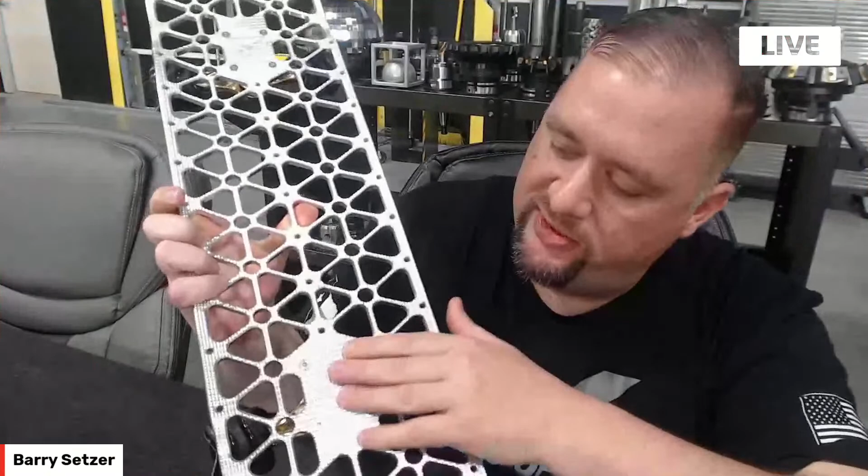You can see that it does have a texture to it. So how did you guys... Oh, that's machined in. Just little machined dimpling? Permanent grip tape. Yeah, that's fantastic, man. Oh yeah, man, it was super cool. That was probably my favorite video.

And then, is that a tutorial? In that video, do you get into how you would machine this? How deep do you get? We got pretty deep in the programming side of it and the method that we used. The modeling we didn't get into all that much. It was kind of simple. I just modeled the quadrant of the board, the surface, and then just mirrored it around, mirrored it twice, and then thickened it.

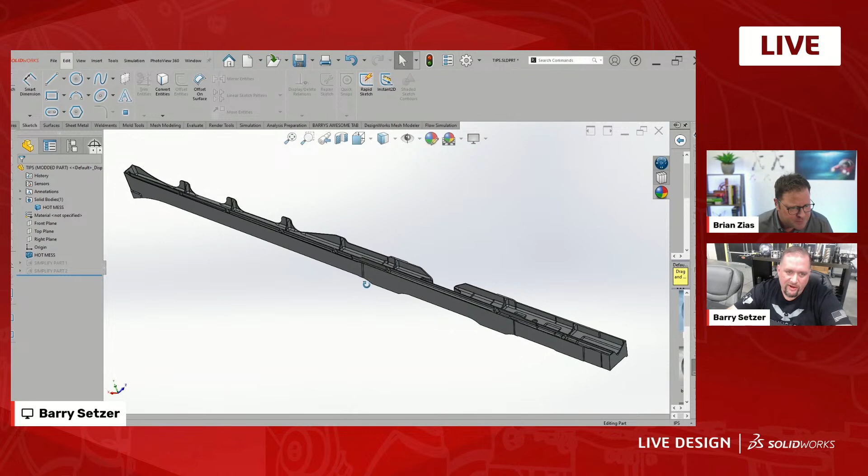So this is an aerospace component, and maybe you can share a little more of the background and what's the girth of this thing. It looks very slender and difficult. Yeah, so it's roughly 12 feet long and maybe 8 inches wide at the widest point. Twelve foot, 8 inch. Yep, this was probably the most difficult part I ever had to model in my career. Took me several months to finish it, and it may not look like much, but once you understand aircraft drawings, all of these surfaces are lofted, they're all tapered, nothing's flat. It's got tilted walls and fillets everywhere, and it was just a nightmare.

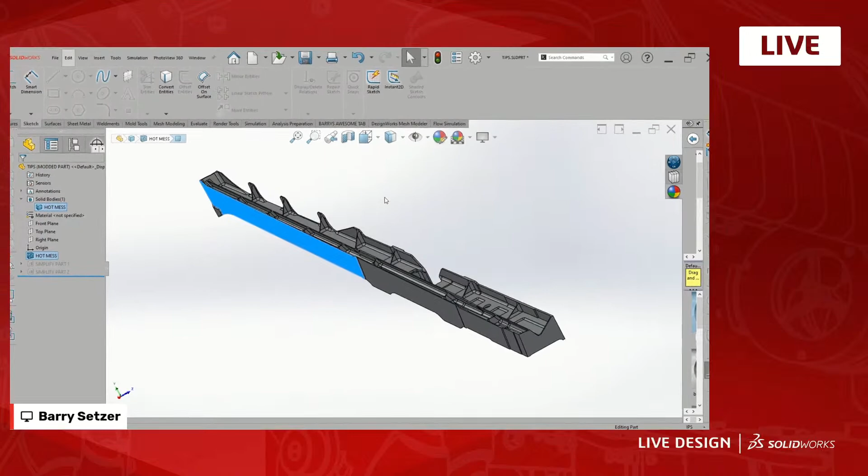And it was a hand-drawn drawing. Well, let me say to everyone out there, Barry showed me under the hood already, there is a whole surface modeling masterclass in terms of legacy drawings, TIFF files, scanning them. You said you hunted out 20 drawings. You're creating line art, surface extrudes off sketch pictures. That's a whole other topic, but I don't know if we have time. If you guys want to see that, let us know in the chat. Do you want us to get back into modeling this from legacy drawings?

Because I also loved where you were starting here, which is a hot mess. There's not even a material on this thing. It's a dumb solid, like a STEP file. This is typical of what we all end up starting with, right? A dumb solid, one way or another. Yeah, and I'm lucky because I actually modeled this part and then saved it as a dumb solid to simplify it for this video. That's cheating, but only a little bit, because the quality, the fidelity, the kernel is going to be the same. But barring all that, what is the material?

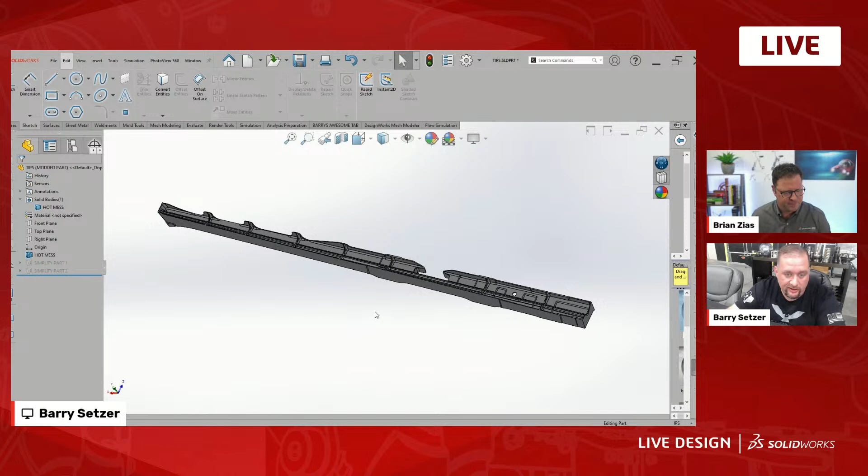A 12-foot beam. It's a spar. It was aluminum, I think 7075. 7075, like a T6 or something. Yep, for primary aircraft structure. This was something that went into the wing of an aircraft. Now, granted, I changed this part considerably, so nothing on it is the original dimensions. So it's a very sophisticated beam that you're not going to be welding up plate by plate. This thing is machined out of a solid billet of 7075. So you want to get this right the first time, or that's a ton of material taken out, and a ton of time.

So dude, all these undercuts and stuff. Yeah, so let's assume, and one thing that Barry highlighted in his last stream, which is that your data can come from anywhere. It could be sketch pictures, it could be TIFF files of Mylar drawings, it could be IGES, it could be a point cloud, and you need to be agile.

Yeah, and one of the things that I appreciate now after watching that is, no matter if the model is perfect, right? It's watertight, it's a solid, but you can't just put this into CAM and expect feature recognition to carry the way. There's a lot of specific modifications you do to this. Talk about fillets, maybe some ribs, some setbacks. Yep. How are you going to accomplish all that? Because you're definitely not going to put an ECO in and go back to the original SolidWorks or get involved in any of that. You just need to make the changes so that you can go and program it.

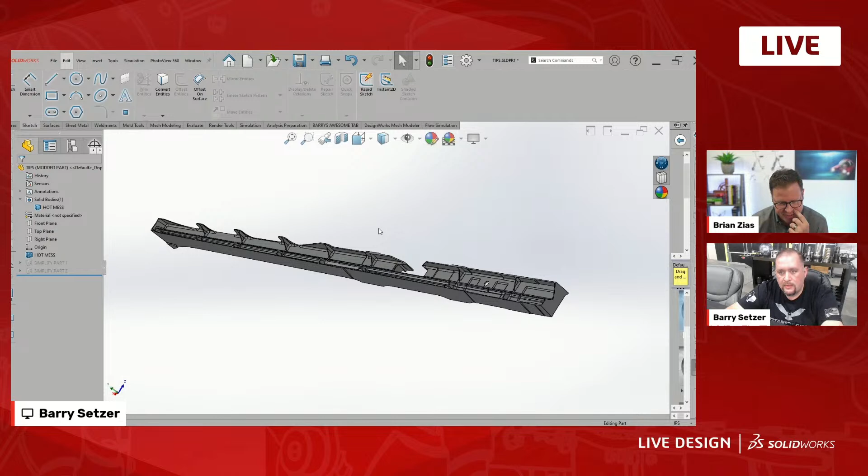I mean, what are some of the things you're looking at right away that need to change after you get this part? Well, you look at the part like this, and you can't. Feature recognition is great, but on something like this, you just can't do it because there's so much going on. So many lofted surfaces, so many crazy fillets. I showed you the actual tree yesterday where I was on like fillet number 270. I thought it was 400. Guys, again, it's a master class. It was brutal.

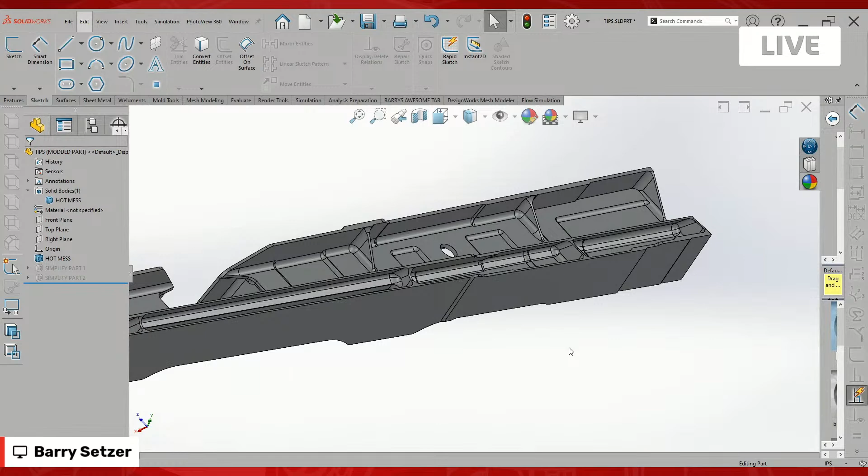But when you get a part like this in machining, a lot of times you'll get a model and say that this is a Rev F model, but then there'll be like 7 EOs after it that are changing things, but this Rev F model doesn't have that. So as the machinist, I have to look at those EOs and I have to modify the features that are required for the finished part because it won't match this model. Oh man, so you end up having to put all the input together and basically be the final CAD designer. Yep.

And again, this is something I want to come back to if we have time: then how do we get that back in engineering hands, right? There's so much modification that happens during fabrication, installation. Yeah. And it's funny, a lot of the times you'll model a part like this for a third party, and you'll ask them, hey, do you want me to send you the model so you could share it with your customer? And they're like, nah, we'll never use it. Oh yeah. It's like, okay. So yeah, there's a lot of stuff, you can't just send this to CAM.

So again, what are the things you're looking at? What tools are you going to be deploying here? So part of being a good designer or a good CNC programmer is not only being accurate with everything and paying attention to detail, but it's also about being fast. A part like this, you can't spend a year on the model and then another year programming it. You have to get things done fast. And in my experience with SolidWorks, I've been using it since 2005, so almost 20 years now. And what I've found is anytime that I'm struggling with something or something seems too hard, that usually means that I'm doing it the wrong way.

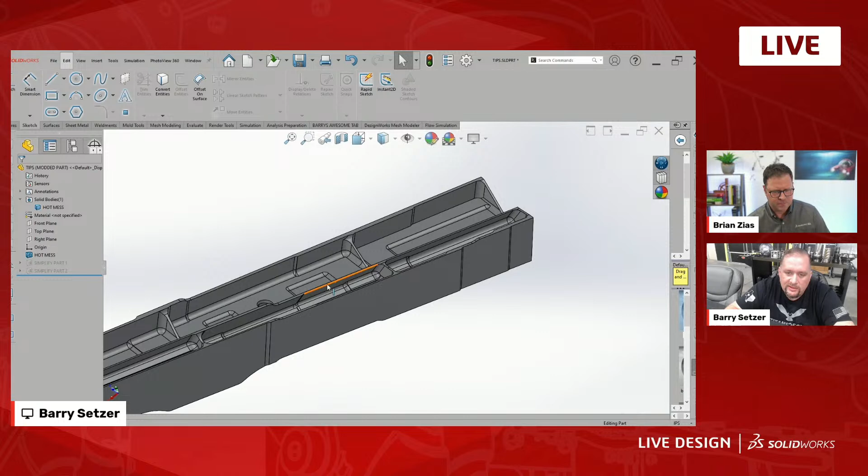And so I wanted to talk a little bit today about some of the things that'll make you faster, things like understanding what certain errors mean and what's causing them, how to fix them, and how to take some shortcuts that, even if a shortcut only saves you, say, 5 seconds a day, over 20 years that adds up. So sometimes it's the little things and sometimes it's basic things. We talked yesterday about how there were times where I was doing things the dumbest way imaginable for years until I saw somebody do something and I was like, wait, how did you just do that?

So there's going to be things in our live today that will appeal more to beginners. Some of it will appeal more to experts, but I kind of wanted to cover a full gamut so that we had something for everybody. This is going to be fantastic. Yeah, Barry was showing me some stuff with delete face. Last time we were talking about offset, copy surface.

I mean, just everyday tools you need to know about. And we were talking yesterday about these are things you learn years on that you look back and you're like, oh man, if only I had known about delete face earlier or offset surface or convert entities. These aha moments. So it's not just using S key and all these shortcuts, which maybe you can dabble some of those in, but how do you take some of the best tools, put them all in one tab of your toolbar, and this is your everyday tool belt on your machine there.

So, all right, what's the first one you want to deploy on this? Well, since you brought it up, we'll start with something super simple. If you look at all of the tabs that we have in SolidWorks, there's a lot of stuff in there, but what sometimes you might not realize is there's even more that's not shown up here. So, for me, I know the tools that I use on a day-to-day basis. So I've created Barry's awesome tab. Okay, pause here. This is the one: delete body, delete face.

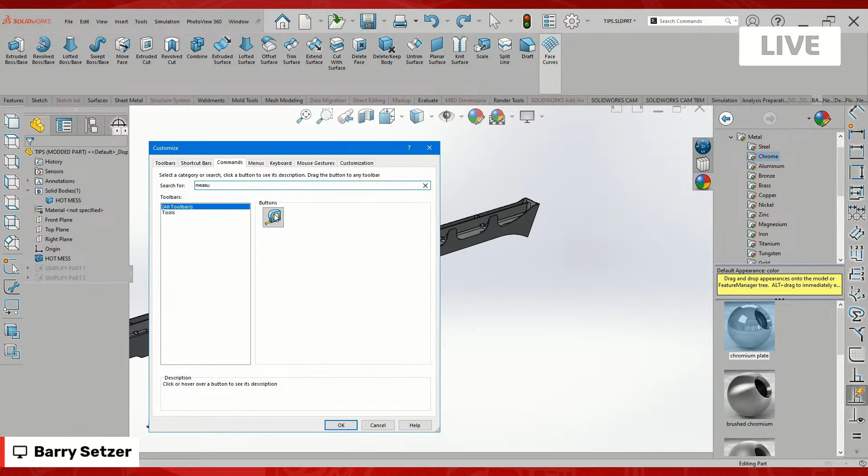Well, you know what you can do now. Are you in 2023, by the way, or what version? Oh, why are you asking? S key command search, by the way. You bring up the shortcut bar, and the command search is right there. 2023, yep. But if you're not using 2023, you can just find the command you want and just drag it up to your toolbar. Done deal. So now I got measure up here.

I like little things like that because this toolbar saves me maybe a split second of going to a different toolbar. And as I use this toolbar more and more, you get that muscle memory of knowing where an icon is. You don't even really look at the picture anymore. So that's just one little tiny thing that helps. But I like the fact that you can create your own toolbars and put your most commonly used things up there.

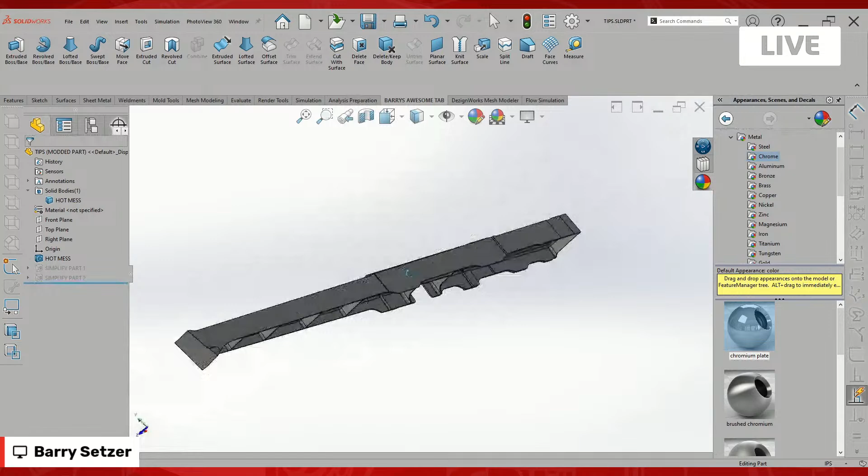But when you start looking at this part, let's just say they want an additional rib, 3 inches off of this face, that goes from this wall to the wall next to it. Now, imagine that's got to be tapered or drafted. Is that the right way to say that? Yep. They're drafted and they're also tapered outward, so you can't just draw a rectangle on the floor and emboss that up. There's a lot of things you can do to cheat it, but in this case, I wanted to show two methods that I use when I have to do something like this, especially on contoured parts or parts where I don't have edges that I can convert.

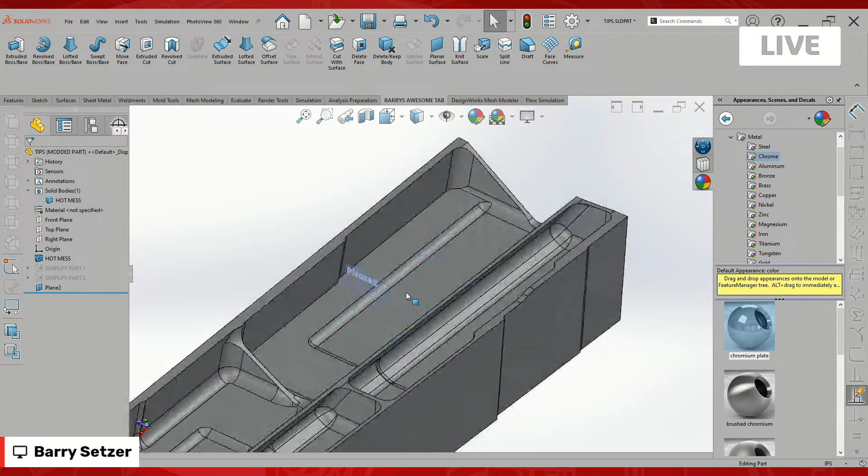So the first way, we're going to go ahead and put a plane in, say 3 inches off of that face. Is that going to be the mid plane? No, I'm going to use this as one of the outside planes. We're going to create a loft here. But to get the geometry of these walls and floors, to get actual edges that I can use, the first tool I'm going to use is split line.

So we're going to use this plane, and then we're going to select the faces that we want to split. Oh, interesting, I haven't used this in years. With simulation, this was a godsend because you could split where you want to apply a force. Yeah, show that one more time. Sure.

That is one of those tools we were just talking about. If you are just learning that now, again, tell me that years ago when I started. So yeah, and split line I think is part of the mold tools toolbox, but again, I have it out here on my Barry's Awesome tab. So all you got to do is click.

We created our plane. We're going to pick split line, intersection, and all of these things are useful. You just got to play with it to know what each one does. So you're not making a sketch or trying to do some 3D sketch or multiple planar sketches and convert entities. It just slices all those faces with this plane. Yep. And you could probably do surface bodies if you want to do some kind of curvilinear intersect.

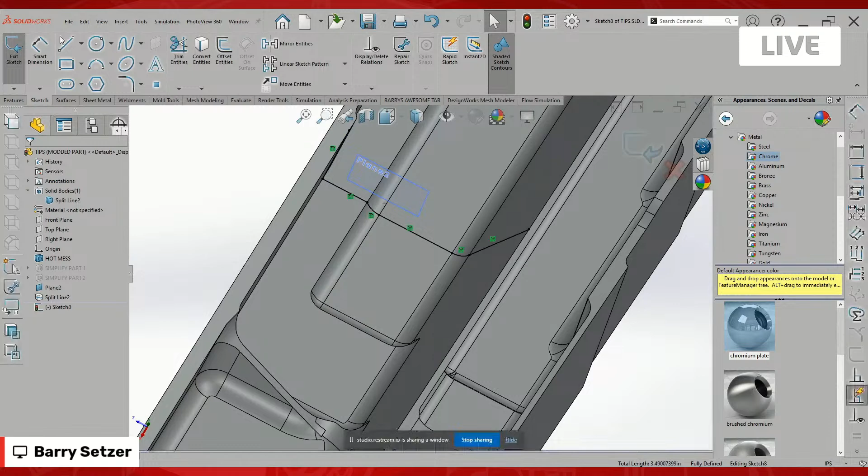Yeah, we could. And I kind of wanted to show this so that we can see how we can get those edges at the exact plane where we need them. Wow, that's great. And now that we have those edges, we can do just a plain sketch on that same plane. We can convert those edges. Whoops, not that face. Yep. That's brilliant. Yep, and then we just draw our line across the top. Boom. Now, that's one section of our loft.

For the second one, we're going to do it a little bit different way, but I like this way because I've used it for a whole lot of different things, and a couple of the other guys here have also found it useful. So now we're going to create another plane, 1/8 of an inch off of that one. And now, rather than using split line, and sometimes you may not want to use split line because you want this to be a continuous surface when we get into machining for our CAM software.

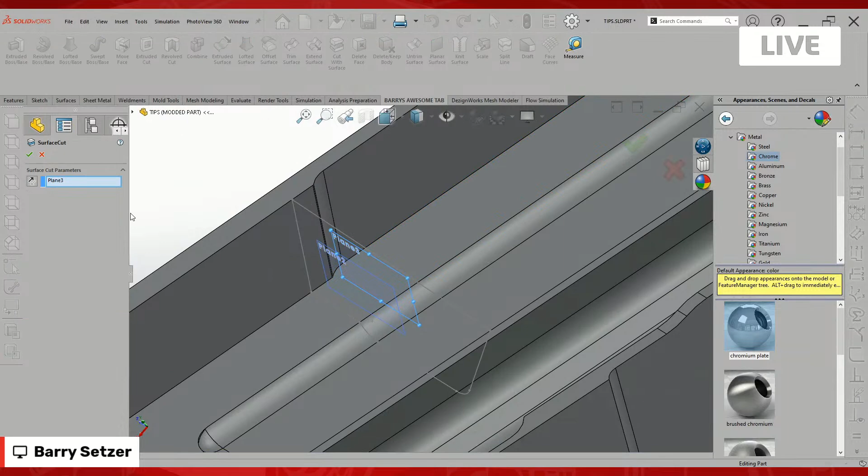So what we're going to do this time is we're going to select that new plane, and we're going to do cut with surface, and we're going to cut our part off that plane. Now we still want the stuff that we cut away, but now we want these edges here. So what we're going to do is on that plane that we used to cut, we're going to sketch. We're going to do just like we did with split line. Draw our little top line here.

Dude, you are stealing edges. This is great. Yep. And I like to call this a ghost sketch. A ghost sketch. Okay, I was gonna say, what do you call this? Yeah. So right now, if I were to close out of this sketch and delete that surface cut, my sketch will have rebuild errors in it because it's tied to these edges that are no longer going to exist. And that's something that, going from like CATIA to SolidWorks, SolidWorks' tree is chronological, and I love that about it because what you did here can't exist until what you did before.

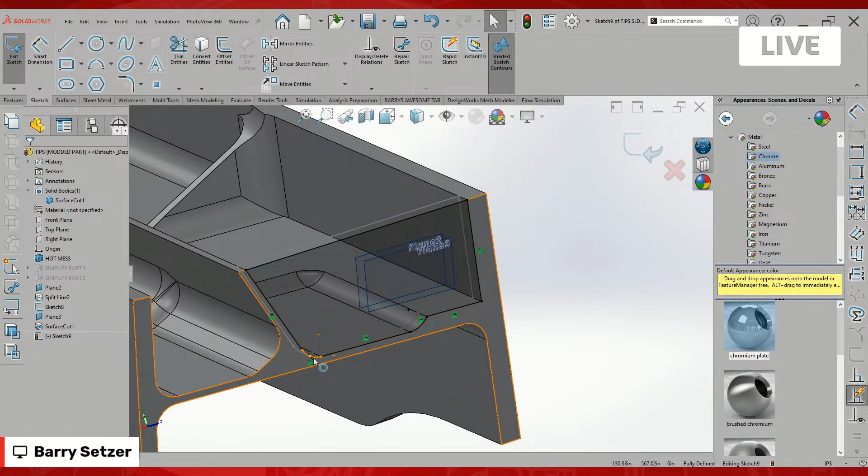Oh, my mouse is going crazy. Zoom to fit. Yeah, there you go.

So in CATIA, what would be different about that? The references, the edge references. Yeah, I mean, back when I was using it, I'm not sure what it's like today, but it had like a separate tree for curves and separate tree for surfaces, and it was just really different to me because I'd used SolidWorks for years before I got into CATIA, and my bread and butter has always been SolidWorks. I've always been a little bit better with it.

But with this sketch here, so that we don't end up getting that rebuild error, we're going to just right click off in space and say display delete relations. Sure. We're going to delete all of our relations. Yeah. Okay. And then we're going to pick our whole sketch and fix it. Sure. It's like an in context assembly, part modeling, no references made.

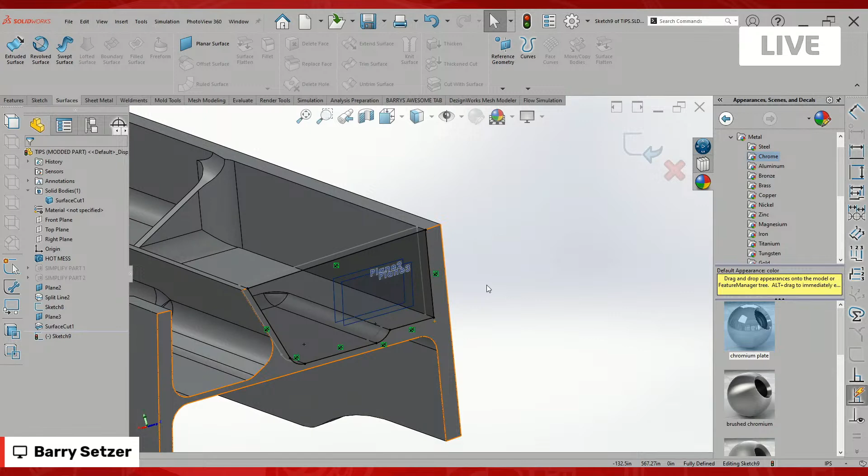That's right. And that's why you got to be careful when you do this, not to sketch on this face, but to sketch on the plane. Because if you sketch on this face, that face is going to go away here in just a second, and then you're going to have another rebuild error for not being able to find the sketch.

Oh, this is great. So just to recap the last couple minutes, what Barry showed us is what he's calling a ghost sketch, which is the next station for his loft. The first one, the plane one, he was showing us using intersect or split line to create an intersection. That's great, but here he doesn't want to create any sharp edges, right?

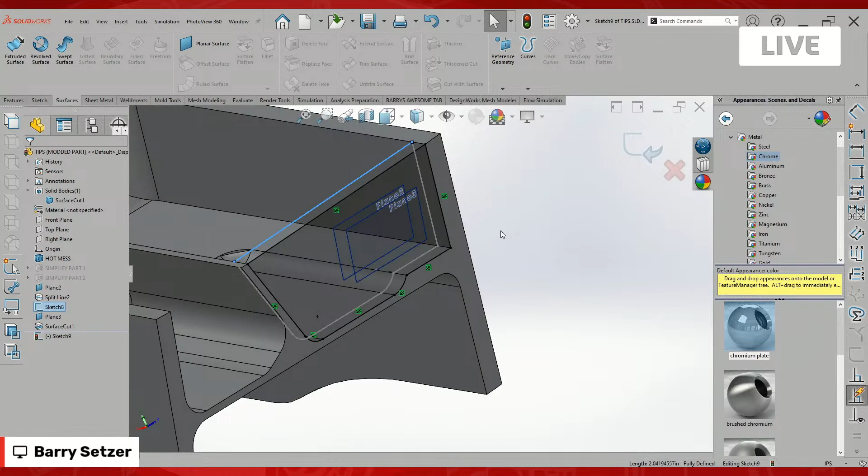Just have those sketch entities. So a lot of, I think, under the hood SolidWorks model tinkering probably comes down to techniques like this. This can be very handy to get the edges you need to then create one more station. Or is this it for your loft? Do you need another one? This will be it for this one.

All right, let's see the next step here. I know everyone's eager to see where do you go from here. So once we get out of there, we now have this sketch using those edges that we just created with that surface cut. But now if we delete that surface cut, our sketch is still there. Nice. Not dirty. And now we have our whole part back. Yep.

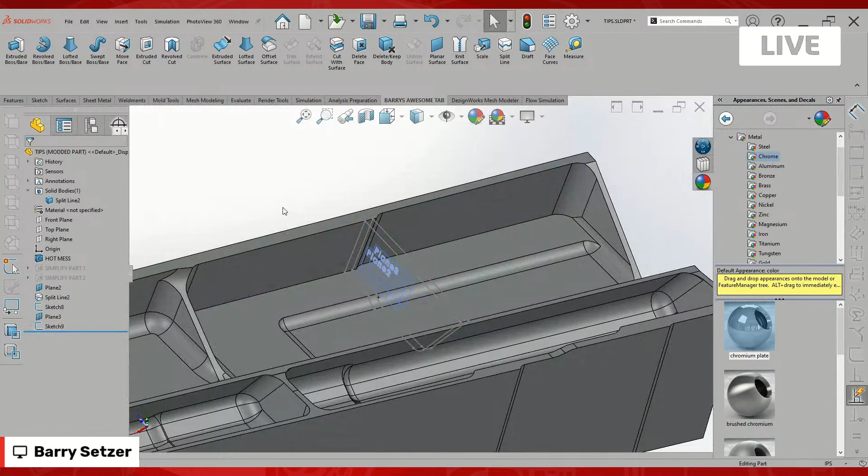So the next thing I wanted to show, a lot of getting good and fast in SolidWorks is when you get errors that you understand what they mean and why you're getting them. So right here, if I wanted to create this new rib, I could just loft it, kind of clicking it in the same spot. And I talked about that a little bit, the last one, I was gonna say the tangents or the connection lines. Yeah, and we'll show that again real quick.

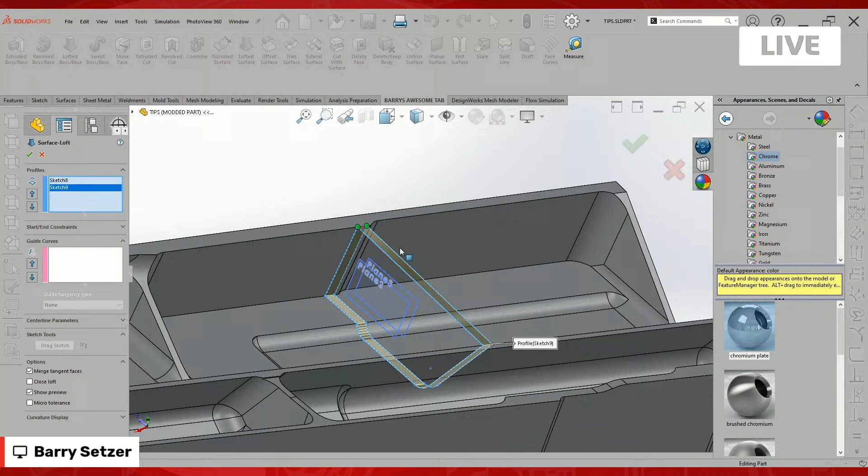Back when I first started lofting, I had no clue what was happening. I would just do like that, and it's like, that is not what I want at all. And then one day I accidentally dragged this little control ball here, and it was like, oh, so I just got to make sure that they line up with each other. That can be kind of tough if you have two sketches that have a different number of sketch entities in them, but usually you'll be able to figure it out pretty easy.

So you have same number of segments, which is key, and then when you select it, just same general area is going to really help you out. And then there's obviously the curvature display on the bottom if you had more than two sections there. But yeah, that looks great. That's going to follow the surface. I would have probably done something like trying to offset those surfaces, done the planes, and then done an intersect or a combine type thing. But this is great. I really love what you did there.

And that's the beauty of this. I will never say that I'm showing you the best way to do this, but I'm showing you a way. It was fast too. We're 10 minutes on that one.

Yeah, and that's with me sitting here blabbing the whole time. You and me both, my friend. But it's fun. It's our show. Yeah, and folks are enjoying it in the chat.

We got Michael Paul: if you use intersection curves, you don't have any dangling relations. That's true. You could also use an intersection curve and not split the face. But I think that's a good point you made last episode, Barry. You said at first there's hundreds of ways to do something. There's no right or wrong way as long as you end at the result you want. And then later in the show you said thousands. I'm thinking, there's maybe dozens and at least two that are going to get a hot debate. But either way, if you have more ways to get the edges you need for your loft, that's fantastic.

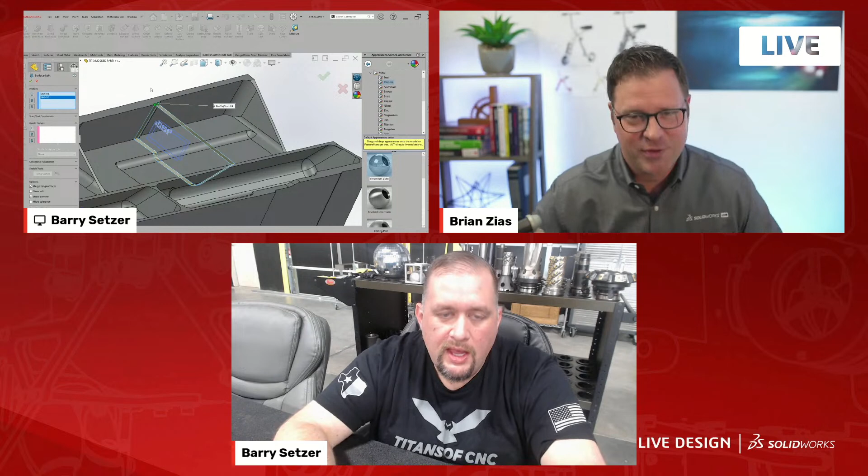This particular application of these two methods may not be the best example, but there have been times where intersection curve wouldn't work for me, the split line wouldn't work for me, and the ghost sketching did. Just knowing the methods available to me, when one thing doesn't work, I can use one of these other ways. And I think that's super important for anybody that uses design software like this every day, is just knowing what's out there.

And having worked with this for so long, I can tell you right now that because I have this new feature merging with my solid body, I know right away that when I click check mark, this is not going to work. Of course. Oh, surface. Oh, no, it did it as a surface. Okay, that's what happened. I wasn't sure if you meant to do that, because you could definitely do the surfacing route. Use plane, intersect tool. Yeah, I meant to use lofted body. And what's cool?

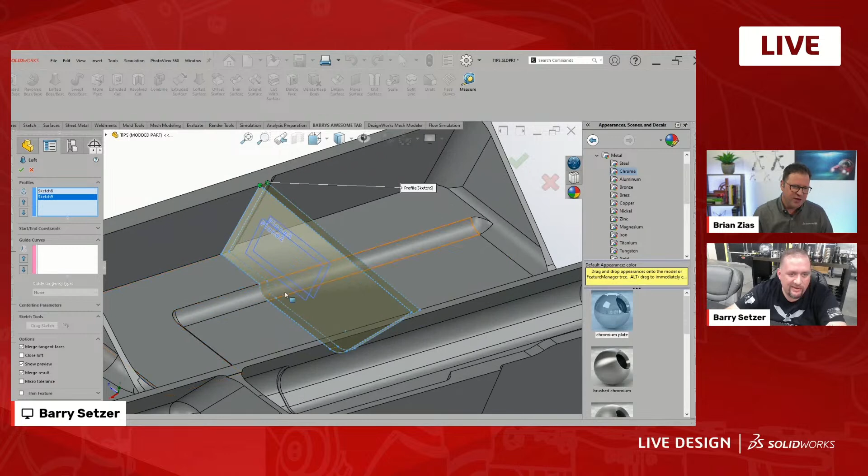I was thinking you could actually, if you had to, tilt the planes by a degree or two to actually make, I guess it would be a planar line. But it has to be drafted, right? How are you going to accomplish that? Well, this particular one doesn't have to be drafted. All these other ribs aren't. Okay. They're vertical, but you can machine that then.

Yeah, but we could have done a similar thing and just sketched a 3D sketch here on this wall at the angle we wanted, and then done the same thing, created a plane using that line and gone from there. But to get into the problems of what's about to happen here, I want these two bodies to be one solid body together, but if I tell it to do that, it's going to tell me no, and it's saying that it would result in zero thickness geometry.

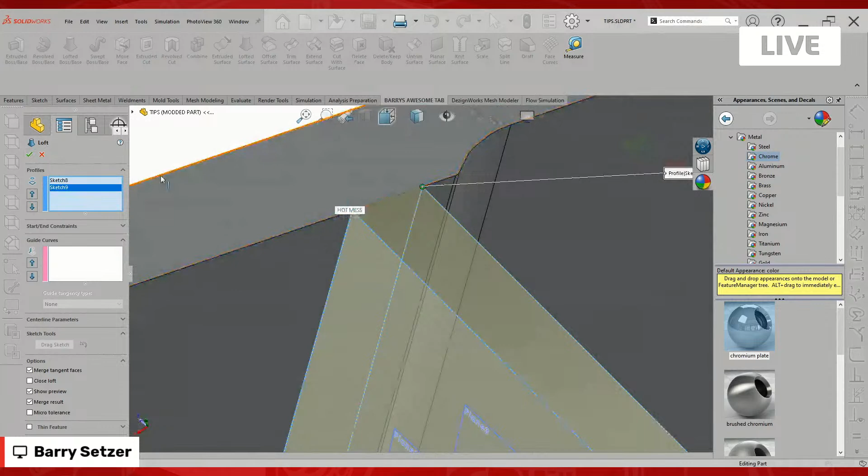So what it's telling me is that there's tiny little gaps, or literally what it's saying, zero thickness geometry. So it's not able to merge that body for me. So there's two different ways we can fix it. I'll show both. The first is we can use guide curves. So every edge that we have there, we're going to pick each one. Or else it's just going to do a linear interpolation between your sketch entities unless you guide it.

Right. And the surface, even though it looks straight, especially if it's imported, who knows what kind of variation it has, and they do have some curvature in them. So if I give it guide curves now, it should work. And it did. Oh man, that's fantastic. And you have one body. Just to double check, one solid body, so you can go ahead and apply that generous fillet on the inside. That looks pretty generous, exactly.

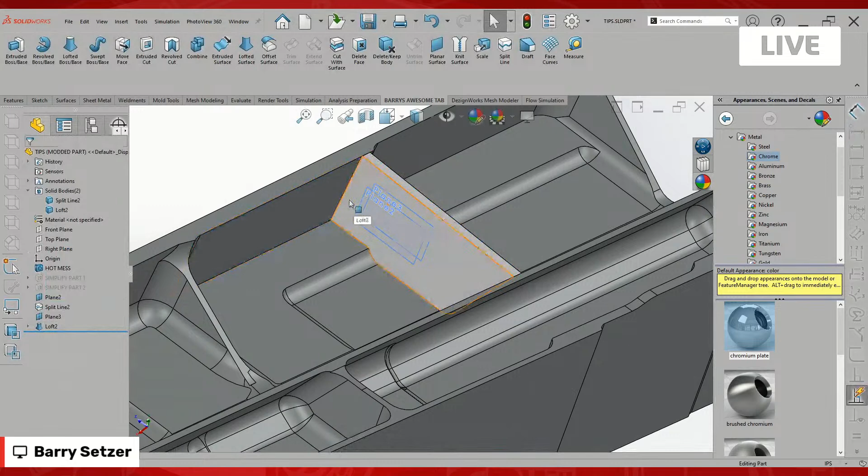And alternately, if we didn't want to give it guide curves, we could just not merge it. Now we have two solid bodies in our tree. We'll hide the one, and then we're just going to offset the surfaces by just a tiny bit, 10 thousandths. Overbuild it, right, and then let it just blend together magically by the power of solid continual geometry. Blend thine self. Oh wow.

That's a great example. I could have seen myself offsetting those inner channels, but that creates some pretty heavy, big surfaces. That's a lot of overhead. If you're doing 100 of these little tweaks to the model, this is a very economical way to do it. And it's fast and easy. And sorry, I said offset surface because I'm so used to clicking on that, but it's move face. Offset surface would create an additional surface body, but move face just does that and then knits it, creates that extension.

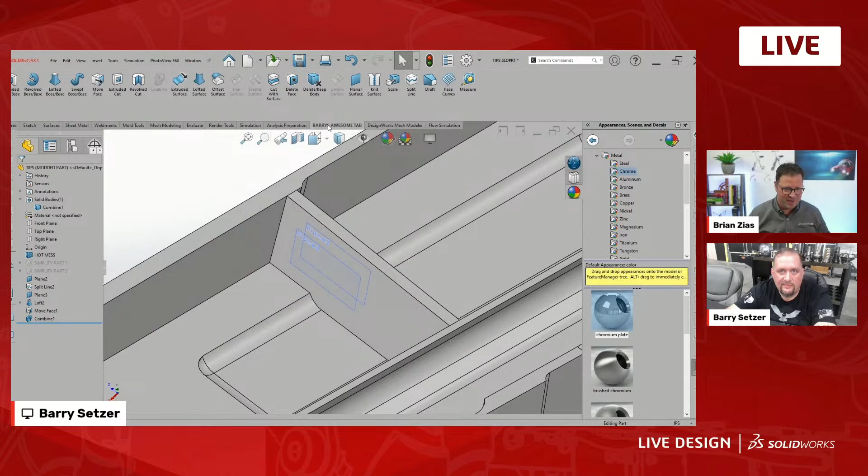So now if we show our other solid body, you can see that they're intersecting with each other. So now we can just use combine. By the way, guys, multi-body modeling, we've covered it six times now on Live Design. If you go back, I think it was December, Brad Williamson hosted an episode with me, and we looked at my workbench, which is a giant dimensional lumber multi-body model. So we talked about that solid bodies folder, how important it is.

At this point, getting into any type of modeling like this, if you're new to SolidWorks, just master the solid bodies folder and have it shown all the time. Right now, I think it auto hides sometimes. You don't want that. You want to be a master of your bodies folder. That's right. And you have to be constantly cognizant of what's in there, because there's been a lot of times where I thought I was working on a solid body, but realized later something I had done, deleted a face or something, turned it into a surface body. So I always keep an eye on what I've got in there.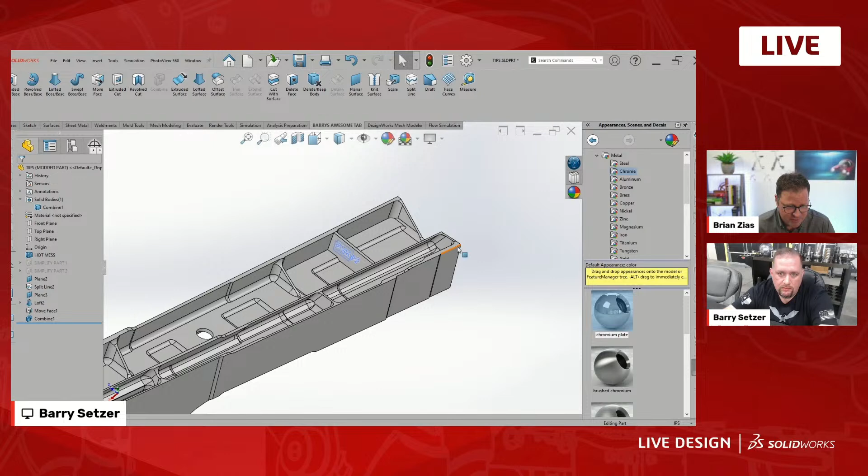Barry just created a really nice rib. So I was looking at that fillet on the other ones. That's pretty big. Is that easy for you to mill out when they give you nice chunky fillets like that?

The bigger the fillets, the cheaper it's going to be to machine in almost every case, particularly wall fillets. Okay. So, I did a SolidWorks tips and tricks video on design for manufacture for our own YouTube channel. Yep. And I talk about a lot of this, and I give the rules. If you're going to make a wall fillet, don't make it an even fractional number, because most of our cutting tools are going to come in those even fractional numbers.

So if you make it exactly 1/4 of an inch, I have to use a tool a step down from that. Otherwise, my tool path will have a sharp corner there, and I'll get a bunch of chatter in that corner. So what I tell people to do is try to go 10% over an even fractional number. And that holds for metric too. Don't make a wall fillet 6 millimeter, make it 10% bigger than 6 millimeter. Oh man, that is another gem. Okay, so to prepare for machining, oversize my fillets by 10%.

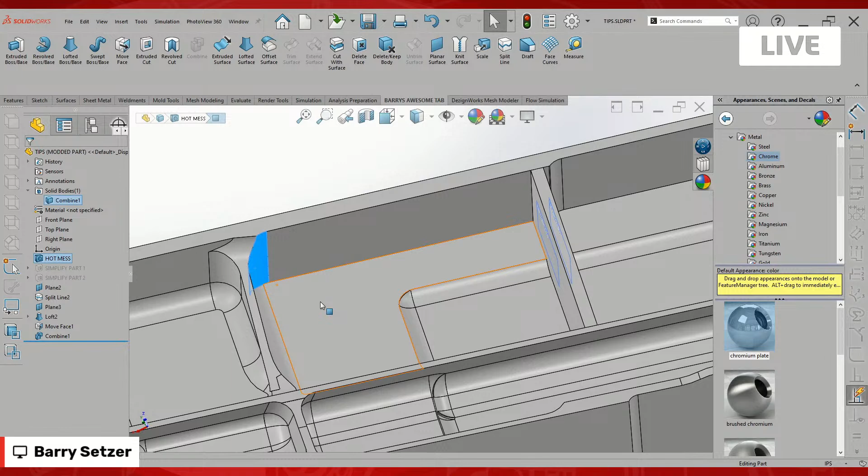Does that get into something you were telling me yesterday about having to use delete face, copy surface, these types of tools to change the size? Yep, and that's what I was going to get into. Oh man, let's get into that. Let's get to some more technical nuggets. This is fantastic so far. So don't apply the exact fillet you want. Oversize it. Yep. What if the fillet is not a feature? So let's get into that.

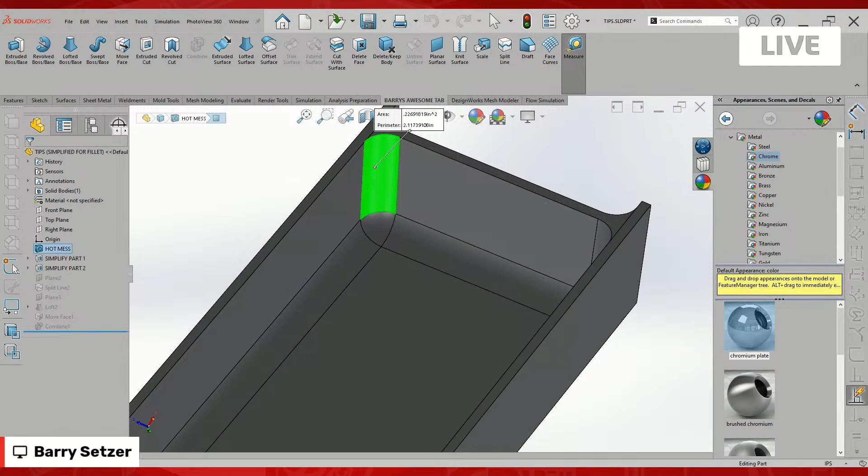So I've got a couple of suppressed cuts here. I figured we would just focus on a simple area. So all I did was cut away a bunch of the part just so it's a little more clear what we're doing. So I have this imported body here. When I click on this fillet, I can't tell what size it is. If I use measure, it can't tell me what size it is because it's an imported body. It's a lofted feature or swept feature, something like that. So the first problem that I have is how in the world do I measure that?

And this may be kind of basic, but it's one of those things that I happen to do a lot. So I'll just create a 3D sketch and I'll pick a 3-point arc. And just snap that sucker on there. And now I can check that, and it tells me that's a 190 radius. That's smart. Good job. I think we've already had people mentioning two tricks they'll use on Monday.

Guilhem, thanks for being here. Marty, yeah, that's awesome. This is a great one.

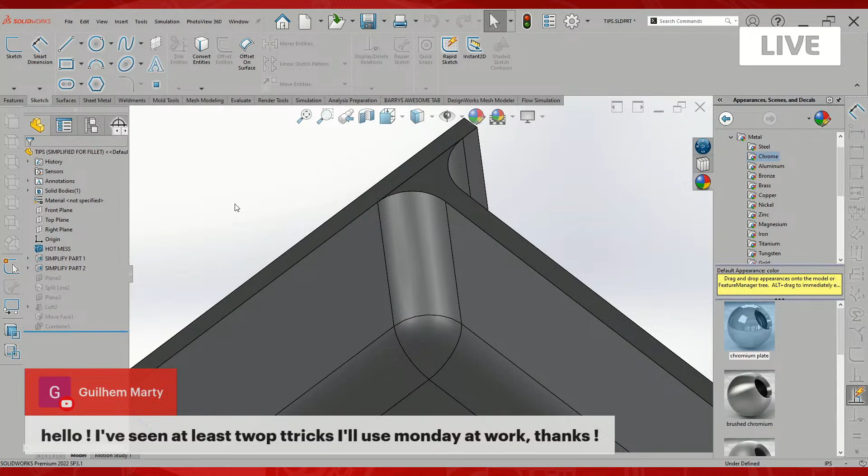Getting a quick measurement. Yep. So now with this weird surface, I was able to get that radius I needed. I didn't need to keep that sketch. It was just for me to get that measurement. And I don't know about the rest of you, but in my keyboard shortcuts, M is measure. So keyboard shortcuts are another good thing.

But let's say that 190 radius would mean I'd have to use a 3/16 end mill, and that's still a little bit too close to that size. But let's just say that the drawing would allow me to use up to a 0.3 radius there. Well, I want that as a machinist because it's going to allow me to make the part faster and it's going to look better in the end. So how the heck do I get this bigger fillet in there? I would offset. I don't know, man. It's a rat's nest because there's no fillet feature, so you'd have to offset that, then offset the adjacent faces.

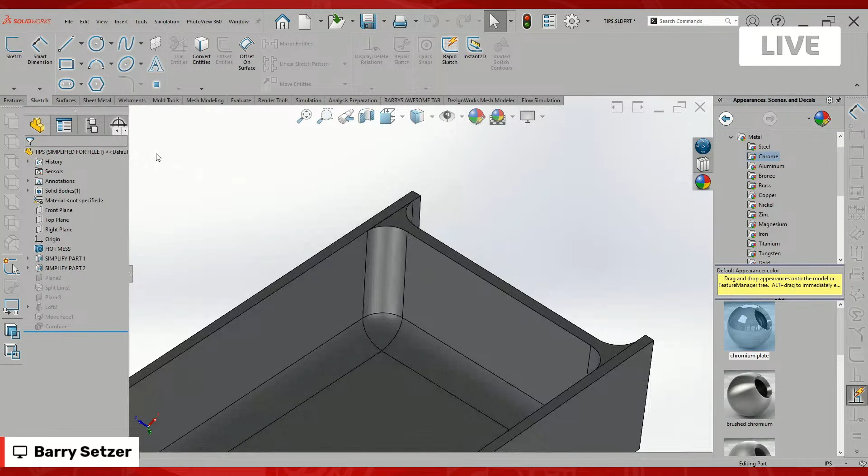So I'm going to show a couple of ways of how to do this because this is probably one of the things that we modify the most as machinists. Because nobody teaches you in engineering class to go 10% over a fraction. No, because these are things that take experience in the machine. Half the people here say they have never heard of that. No, and most people, I was an engineer, or at least a designer, and I just threw whatever looked good in there to me. It's like, how's 1/4 inch look? Oh, that looks good. I'm gonna leave it.

But you said this a few minutes ago. Like the larger the radius on these wall fillets, the cheaper, the faster it's going to be, right? Yep. And for floor fillets, just to touch on the floor fillets, that's not the case.

A floor fillet. In the YouTube video that we did on design for manufacturability, I think we called the video something like, taking a $50,000 part down to $500. Okay. And I have a chart in that video where I tell you, here's the floor fillets that you should use, because we got two things happening. We have a cylindrical end mill that we're going to get into that corner with. And that end mill has a radius on the tip of it, which is what creates the floor fillets.

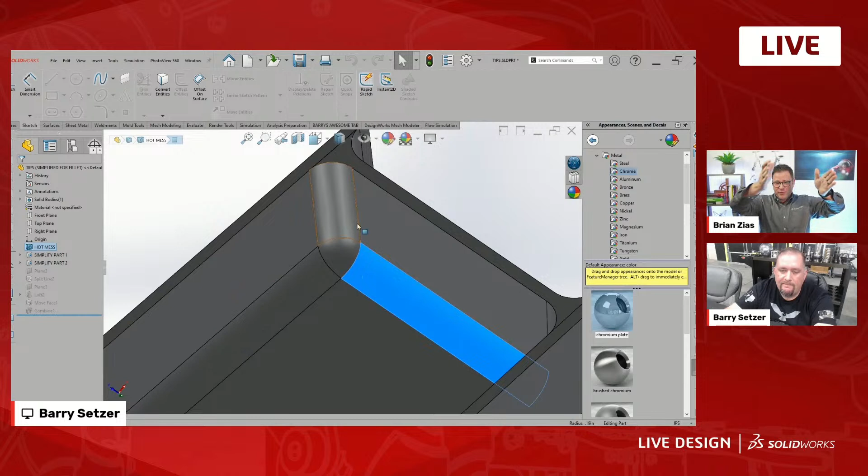Sure. So the tool is now perpendicular down into your screen as we're milling out in this setup. Yep. And so, generally speaking, our end mills are going to have pretty small nose radiuses on them, 30 thousandths, 60 thousandths, 90 thousandths, 1/8 inch. Makes sense, yeah. So if you make a huge floor fillet, now we're going to have to surface machine that by going back and forth over that surface hundreds of times. Because you're extending the length of the route, right? That you have to get down and make a contour for. That's right. Makes so much sense.

Okay, so wall fillets, bigger, generous, because that's in line, or I guess parallel to the tool. So you got to be thinking about your tool path and the tip radius. You're saying the nose radius. Yeah, and something that engineers can do to really help out, if those radiuses don't really matter to you, give us a wide open tolerance that will still work for fit, form, and function, but tolerance can make a big deal for machining a part.

And if you've done like me and just thrown a random radius in there just because you like round numbers, tolerance can fix that for us. But as the programmer, I have that tolerance, and now I want to change this fillet. So what I'm going to use is Barry's awesome tab here. We have delete face. Now, a lot of us have used that before to delete a face, and that's just exactly what it does. If we look at our tree right now, we have one solid body.

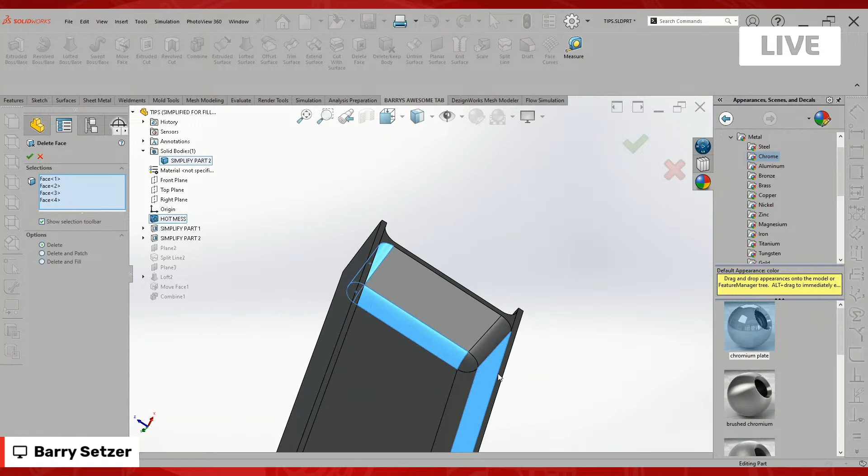So if I delete these couple faces here, I'll stop it. Yeah. It's just open. Yep, it's just wide open. Yeah, that's terrible. And now it became a surface body. So something that I really liked that I only started using maybe a year, maybe 2 years ago was this delete and patch. Yes. And whenever I'm working with fillets on any kind of complicated surface geometry, even though this doesn't look complicated in this state, it is. I try to keep things simple.

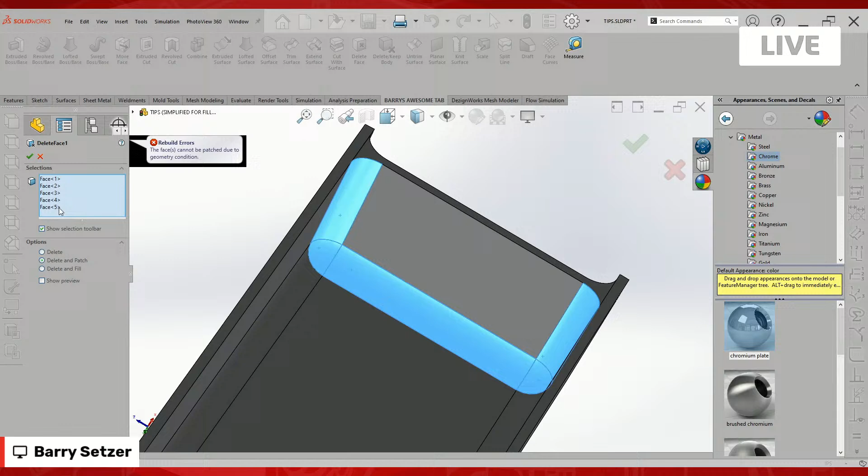So with delete and patch, I'm pretty sure if I pick all 5 of these, it's not going to work for me. You might have to pick those other 2 legs, but that might actually make square. Which is what I'm going for at the moment. Oh, look at that. So sometimes, it's just tough because there's so many vertexes and so much weird stuff going on, like where this face is meeting. So we're just going to keep it simple, and I'm going to pick one at a time. And you see what it did? It completely got rid of that fillet and gave me a nice edge.

I was going to say the best tip with delete face is it's powerful, but you have to do things sequentially with multiple features because it's basically deleting it and then extending the surfaces. I guess I was going to ask about delete and fill. I've never really used that as much because it seems to be more interpolation. But do you ever find a use case for delete and fill, or is delete and patch 100% the go-to? Yeah, I've tried delete and fill several times.

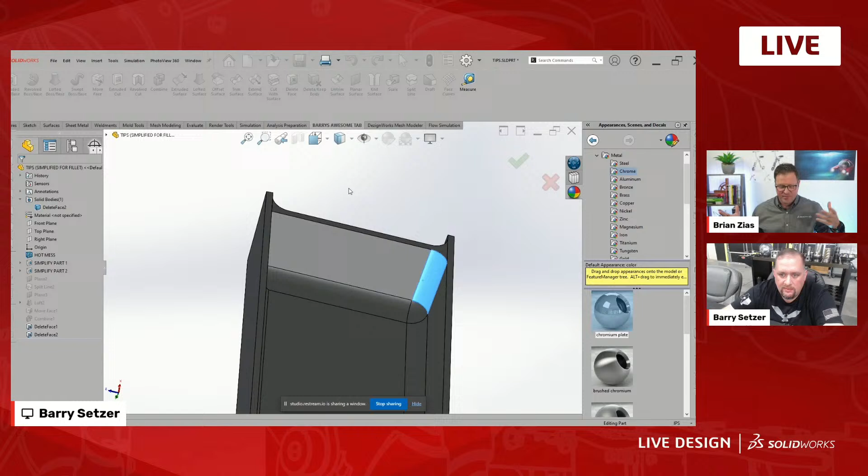Yeah, a lot of times I get some pretty weird curvature out of it, but I have used it before with success. But that's just another one of those things, is understanding how the tools work and when is the best case to use them, and understanding, like we just showed, we tried to pick 5 fillets, it didn't work. We tried to pick 7, it didn't work. Yep. But sometimes you just got to step back and say, okay, let's take this one step at a time, because it needs to delete it and then patch it, and the more faces you're selecting, the more edges are exposed that it needs to algorithmically apply.

So now that you have this hard edge, I imagine, could you go back and just apply a sequential delete and fill, or sorry, delete and patch.

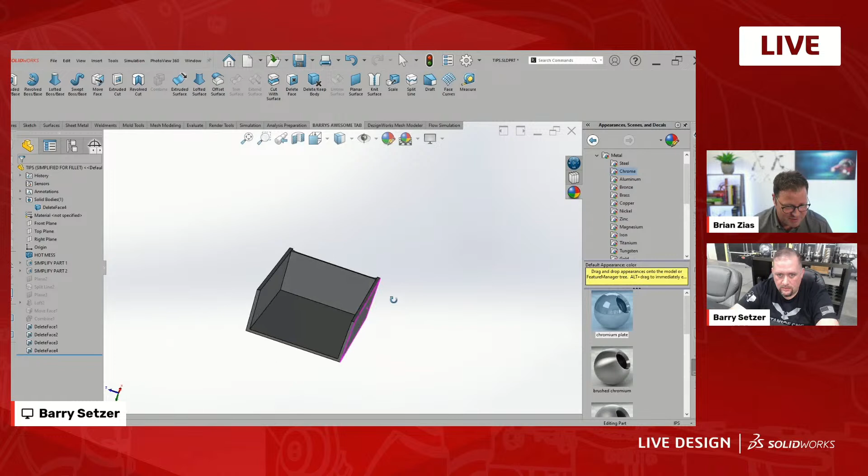So now you can apply whatever you want, right? It's a solid body. Yep. Got our nice solid body. We can start throwing fillets in there, whatever size we want. Okay, so what would you say? You said it was a 0.19 radius that the customer put into their design geometry, guys, right? 190 on the design. Yep.

You said oversize that. Yeah, and so you see, I just tried to put a 190 radius back in there, but I didn't get any preview. So that tells me there's probably something sketchy going on here along this edge. So rather than use just our basic fillet, we're going to use face fillet. Oh, dude. And so now you see it works. So we had sketchy stuff going on in there. And just for kicks, we're going to put that same 190 radius in there.

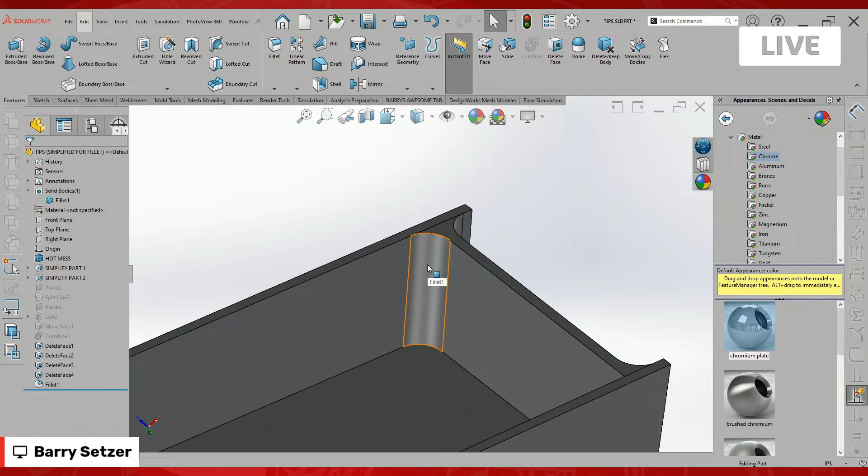Now, when you have a simple wall radius like this and you want to increase the size of it, it's super simple. If we want to shrink the size of it, sometimes that can get a little bit harder. But one thing I like about increasing the size of a fillet is you don't have to go through that whole delete face thing, so long as it's not compounding with other fillets. You can just do a face fillet and jump right over it, and then put your 0.25 fillet in there, and your new fillet will jump over that. That's a very gracious feature. Thank you. Yeah, I love that. Thank you, face fillet. Oh man, that is awesome.

The other day I used full round fillet. I'm like, I haven't used this since Essentials class. No, man, I love using that too. There's so many good, valuable tools in here.

Barry, can you go back to your fillet, because I wanted to point something out. You said it really well. It's like there's no preview, so I know it's not going to work. Now you see the full preview, partial preview, no preview. Be very wary of that, because I found it's kind of a sticky setting. If you do no preview, because you're selecting a whole bunch of stuff and it's going to be a performance nightmare, I feel like session to session it'll come back as no preview. I'm like, oh yeah, show preview. So make sure you guys have that muscle memory of full preview on your fillets, because if it shows it, it's going to make it, and that's your instant feedback. Yep.

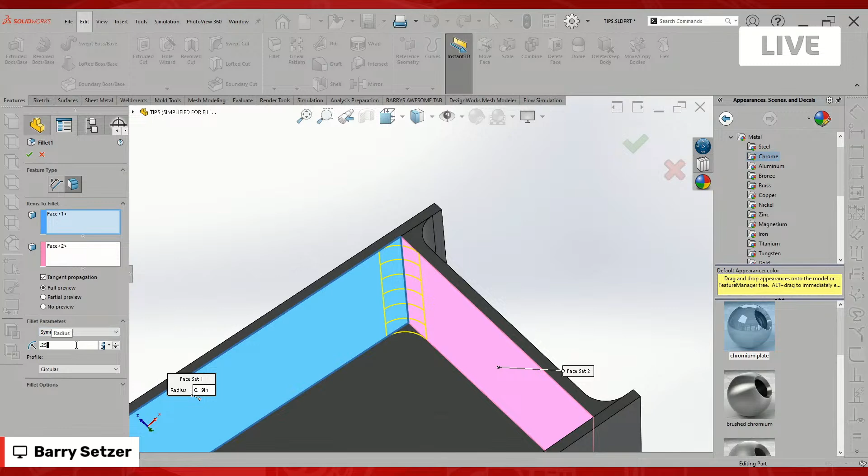Great, man. Hey, what's up, Matt? Yeah. Okay, so we got some good chat here.

We were just talking about how wall fillets like this one, heck, make it generous, add a wide fillet, make it large because that's going to be fast and easy. For the floor fillet, you want a smaller one. So we definitely have some size recommendations. And then we were talking about oversizing it at least 10% or just applying a wide tolerance to give the machinist a wide berth in terms of the radius. So now you could, of course, proceed and do the floor fillets from there. Yeah, we could, except I'm going to stop here and show something completely different. All right. Well, you do that.

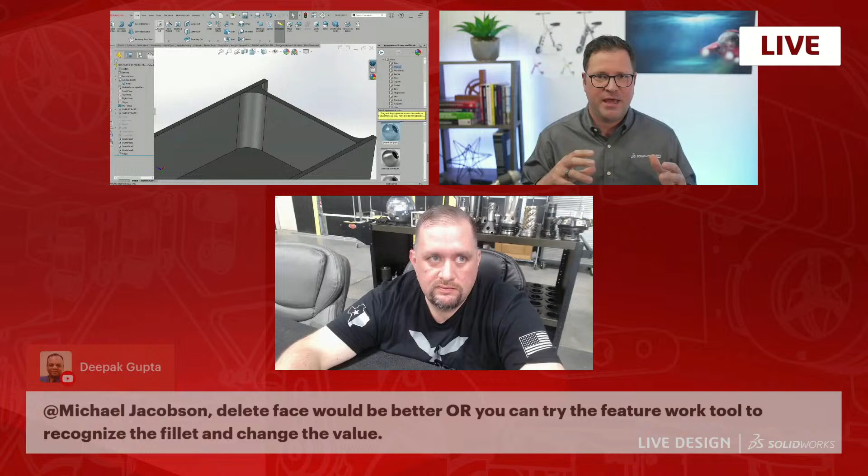Deepak had a good comment. Sorry, it's going so fast. Delete face. Oh, yeah, FeatureWorks. So we all know FeatureWorks. You can bring in that dumb solid and you could right click a fillet and edit feature and it magically recognizes it. I guess Barry's showing us if that doesn't work, but I am curious, Barry, in your experience, do you try FeatureWorks first to see if it can recognize these and backtrack them into editable fillet features? How often does that work for you?

It works. I tend to limit myself to using that in simpler parts. And for this particular part, when I click on the original fillet, it didn't give me any kind of indication that it was a fillet, even using measure.

So right away when I see that, I start having doubts that FeatureWorks is going to be able to recognize it as a fillet either. And it very well may. But like you said, I'm just trying to show what happens when that doesn't work.

Exactly. These are the tools you need because sometimes you got to dig in there and it's not just a paint job. You got to mess with the framing, you're digging into the wall a little bit in your model or your house, in my analogy. Man, this is great. These are powerful tools. We've talked about split, delete face.

So you want to switch gears. While you switch gears, there was an interesting question earlier about the difference between a fillet and a chamfer. All of us who've used SolidWorks know it's just straight cut versus a rounded cut. But let's take it in the context of machining. Barry, how do you feel about chamfers on a model? Where do they make sense versus no? Just dude, don't do that. Save that for your additive prototypes, right?

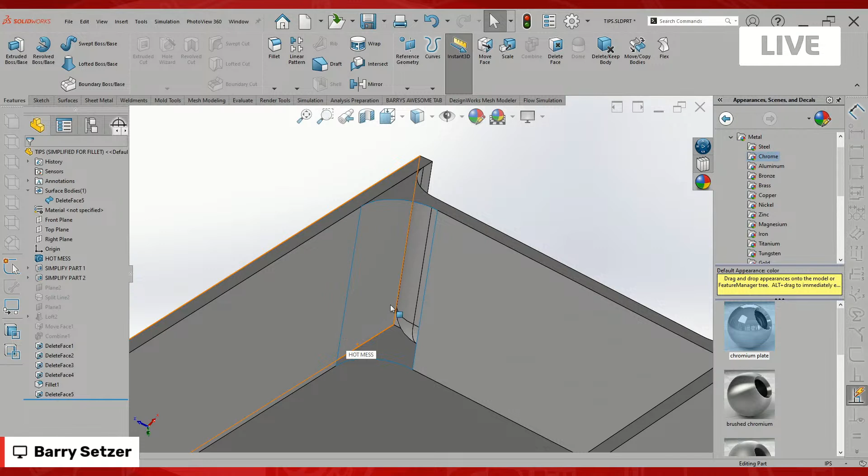So let's just say that we tried to put a fillet in this corner. We tried everything, and nothing would work. So the only thing that we have left is delete face and just delete it. So our goal is the same here, to get these two edges to come together in a corner. So, logically thinking, I'm going to go into my surfaces workbench. I'm going to go ahead and extend this surface.

And the problem with this is as soon as I hit check mark, it's going to tell me no way. Well, why? It just says failed to extend the surface. It looks like it's going to do it. It gives me green. I have no idea why. And the reason that it won't is because we're creating a self-intersecting surface body right now. So even though it looks like it's not intersecting, these walls are tilted and angled and curved. So this extension may be coming up into this top surface.

You don't know. So the way that we're going to get away from that is, rather than trying to extend these surfaces, because we know that won't work. And again, there's other things that we could do that are maybe a little cooler, but I wanted to show how to get away from this error. So we're going to go to offset surface again, and we're going to give it an offset of 0. So this becomes copy surface now. So we're going to copy these two surfaces that we want to use,

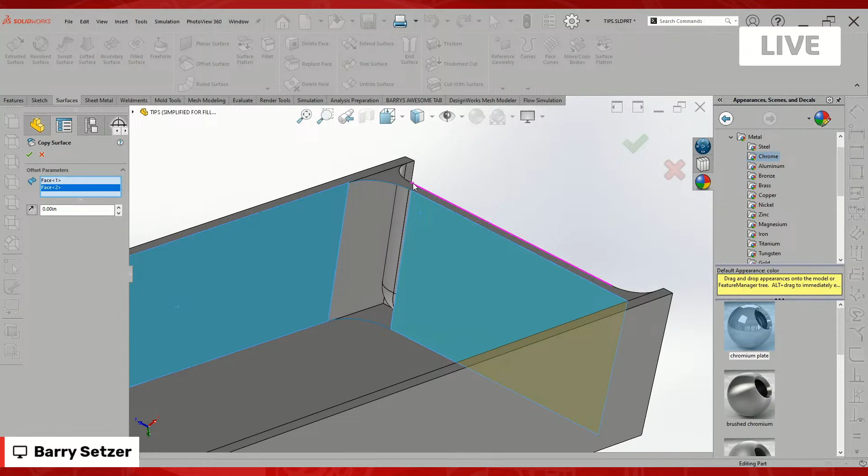and I want to delete the original surfaces. So I'm going to hide that surface offset. I'm going to delete the two faces that were the original, and I'm going to show my new offset surfaces. So now you'll see in my tree I have 3 surface bodies. I got those two and the original. So now if I want to extend this, no problem. Yep. Goes back to what we were saying about 10 minutes ago about the bodies folder.

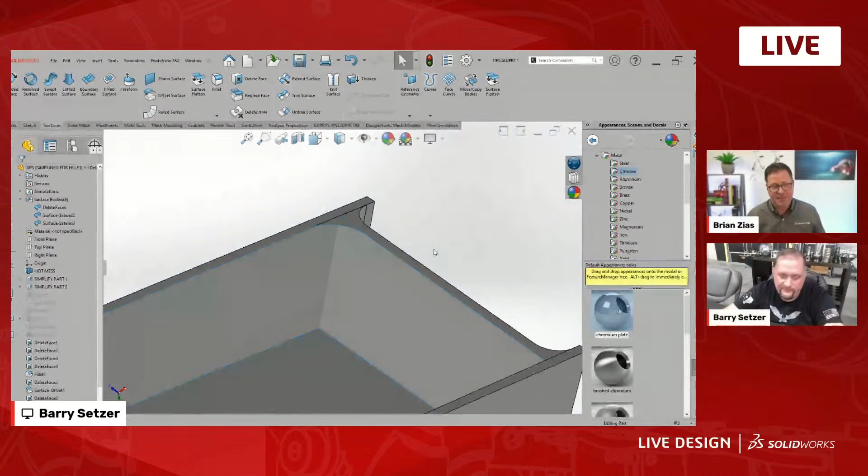Guy, as I was watching you, I was actually watching your bodies folder on your feature tree. You have to be savvy. It's surface bodies, solid bodies, which one is which. Notice it takes on the name of the last feature. Sometimes you can rename that feature. You can rename the body itself. Stay organized so you can follow along with what you're doing, because you've basically created a temporary piece.

Now you're going to replace that all into the master part, right? You've kind of created this accessory piece. Yep. And now that we have these faces, we can intersect with whatever we want, and it's not going to hurt anything. Because they're separate bodies, right? It doesn't matter. Let SolidWorks now trim them mutually, I suppose. How do you do that? So I'm going to also untrim this corner here.

Okay, what the heck is untrim surface? That's one of the ones I pretend to know what it does, because I'm supposed to, as a CSWE and an almost 20-year user myself. But like, what is untrim again? Can you please clarify?

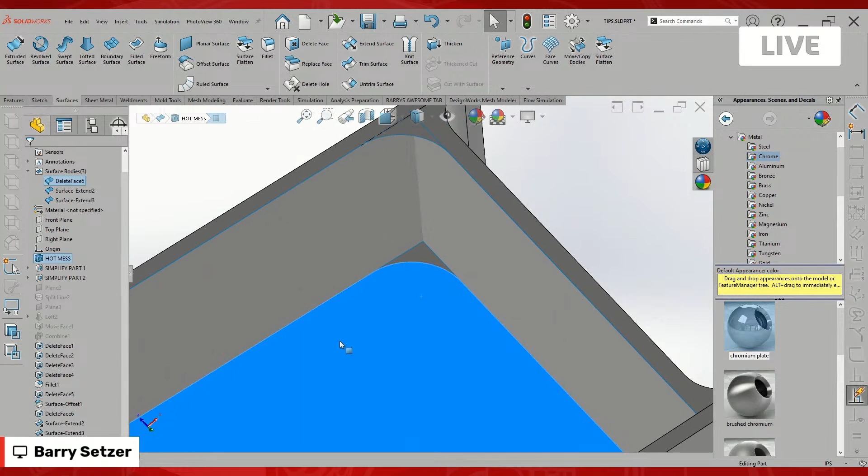Yeah. So if I want this rounded corner of the floor here to go away, I can extend that surface. But you see what it does? It gives me this big extended fillet thing, and I don't really want that. All I really want is to get that cut corner back where it came from. So, extend edges. Okay. So we'll do untrim surface, and we just click that one edge, and it's going to extend it.

A lot of times, if I'm extending the edge of a surface and I'm getting a bunch of weird gaps in it or things like that, that clues me in that I need to go untrim that surface first. So we untrim it. It doesn't want to merge with the original face, but that's not a big deal. Just do the same thing we did a minute ago. Yep. We'll untrim it, hide that, and we're going to delete the floor out of there.

Show our untrim, and now we got 4 surface bodies in here. Now I know that this face is kind of funky here. I can see some weird thick line. So I'm going to just go ahead and delete that face too. Yeah.

And now we're going to start trimming these walls together. We're going to use trim surface. We can use mutual, which is handy, but just so that we understand how trim is working, we're going to pick our trim tool, and then we're going to pick the thing we want to keep or the thing we want to get rid of. In this case, we're going to click what we want to keep. So it's going to get rid of this little extension at the end there.

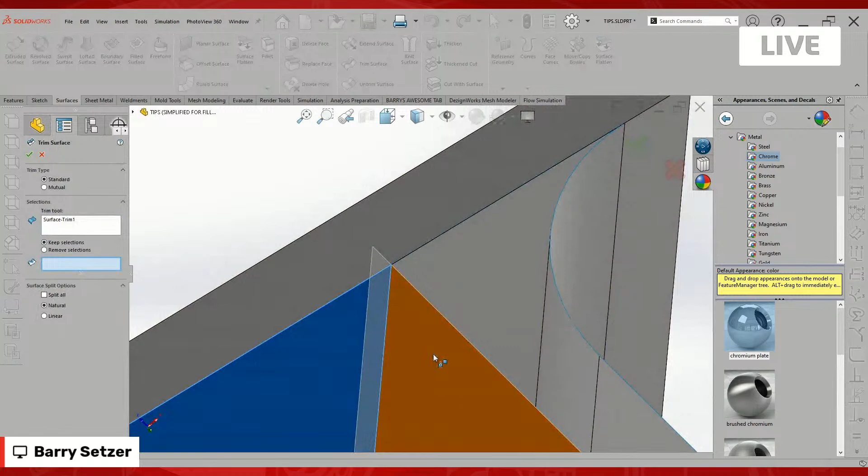And then we'll do the same thing the other way. Get rid of our little extension. And so now we have that. Now, at this point, we're going to try to knit everything that we have together. And the reason that we want to do that is so that the final thing will be capping off this rib here at the top again. So we're going to go ahead and try to knit.

I got to ask, have you ever tried the intersect command? Because this workflow you're doing is so quintessential, right? It's overbuild the surfaces and then knit. Well, you're doing a trim back. Thank you. Untrim. I understand that now. And now you're going to knit. But I feel like intersect in some cases, you can just throw a bunch of surfaces at it and it will do all this mutual trim. Have you ever explored that feature?

I actually haven't, and I had somebody ask me that 2 days ago, so I actually planned on looking into it more. Okay, here's after the show. I would say roll back to before you do the untrim of any of the radius or anything, and just intersect and throw all the surfaces at it. And what it'll do is take all that and find you volumes and let you then keep or delete the different intersection volumes it finds, the different overlaps. So it's not magical, but man, it's cool when it works. I definitely want to try it.

So it's always cool when you do a tips and tricks video and somebody else teaches you tips and tricks. Well, you've taught me a lot. This is fantastic. The chat's loving it too.

And again, this may not be the best application of what I'm showing you, but the purpose is to let you understand why you can't have a self-intersecting surface body, how to get away from that, how to clone surfaces and reattach them. Because in the end, this is a fillet. So I'm trying to keep it simple, but at the same time, these carry over on the much more complicated things.

Yeah. So I'll wrap this one up quick, but a lot of times when I'm using knit surface, rather than go for the gusto and pick everything, I'll try to kind of give it two opportunities. So I'm going to knit my three new surfaces together. Then I'm going to try to knit it to the original surface, which you can see in the tree worked. So now we just need a filled surface basically up here on the top. I'm going to just do a 3D sketch for the sake of time.

Yeah, convert those into the 3D sketch. What about a boundary surface? Would that work with this many edges? I think it probably would. Boundary fill is getting more robust lately. Yeah, and that's just one that I've been comfortable with for a long time. Thanks for that tip, Brian.

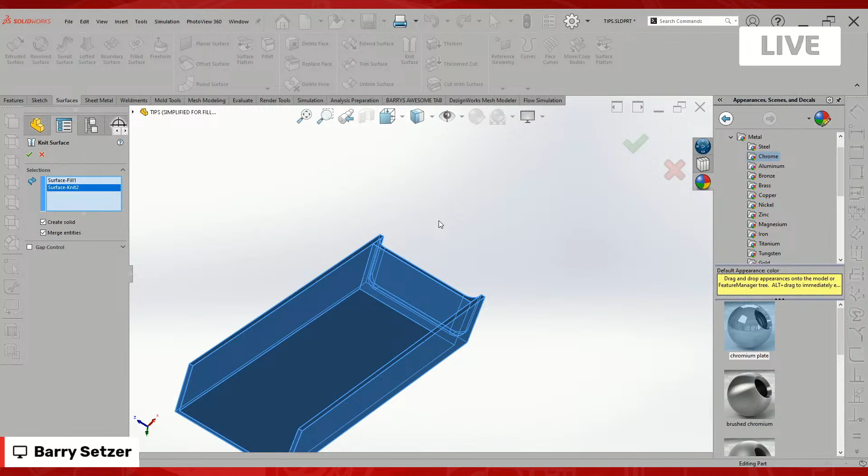Yeah, boundary surface. There's a lot of surface tools you want to be able to deploy. It's all about the variety of tools and just deploying them. You're getting into sometimes going face by face. So you've got to disassemble to reassemble it the right way. Reconstructing the walls is easier now than trying to modify the features. Just cut to the nearest stud, put in a new wallboard. Yeah, and that's exactly what we did here.

And now that we have all of our surfaces created, we'll just do a knit surface with create solid and merge entities. Oh, and it hates us. What if you don't create a solid? Sometimes that's an extra step. Most of the time when we're working in CAM, we prefer to have a solid. That's a good point. You need that. There's plenty that we can do.

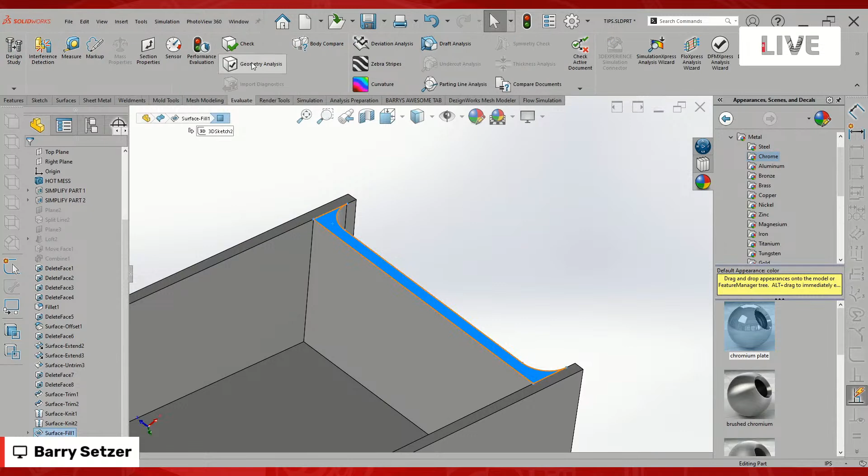We can go into Evaluate and do a geometry analysis, or check I meant, and it'll tell us what's wrong. Two open surfaces, got a problem there. Yep, that's nice. But not a big deal. We'll just get rid of that and try the smart way. I think we've all been down this road. Make sure you're getting all the little entities you converted. Select tangency, select open.

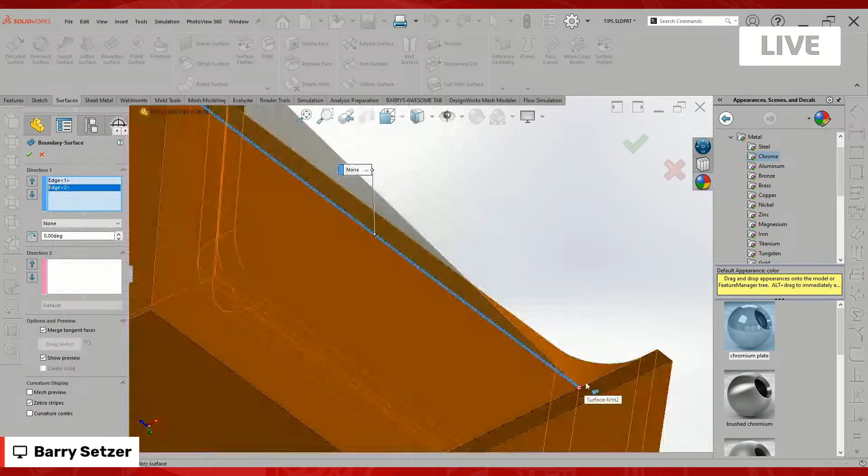I wonder though, what if you just left it? You said you want a solid. Is that always the case, or are surface bodies ever used for milling? It's not always the case. We can work with surface bodies, and some software prefers surfaces, like PowerMill. But I'm a Mastercam user and pretty much always have been, so I prefer a solid. Is there a benefit to having the native features when you get to CAM, or is it really about the geometry? At this point, it's really about the geometry.

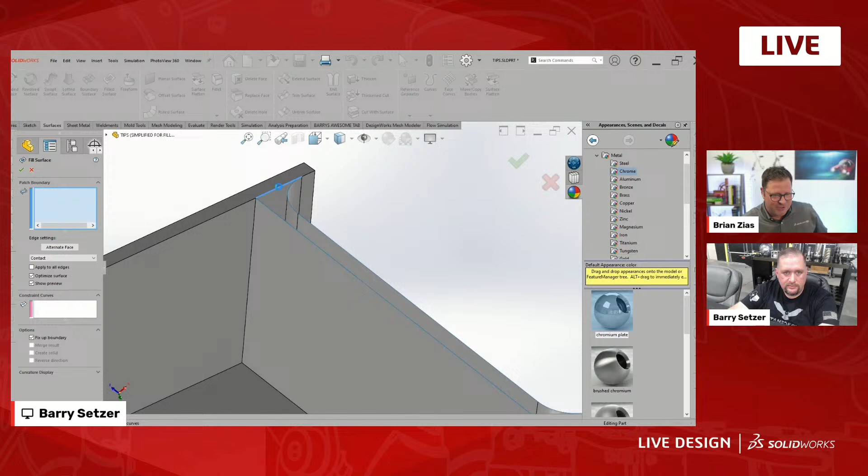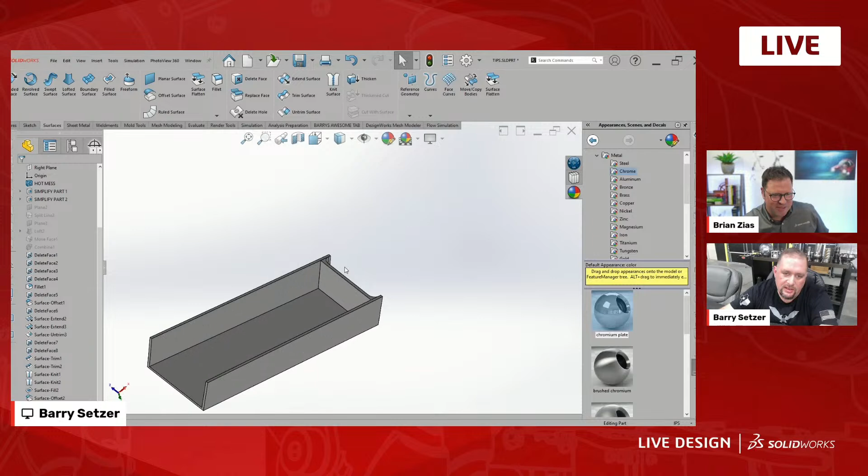Exactly. So you ended up machining this out of aluminum. How long was the runtime? How would you describe the complexity? Is it just the size and the setups? What made it complicated in the beginning was the drawing being as old as it is, drawn by hand. Everything I did seemed to not go together properly. With a hand drawing, 10 thousandths off is fine. But in 3D modeling you want everything perfect. So making the actual model was super tough in the beginning.

And then we were making this on a 3-axis mill that just had a 4-axis rotary on it, so we could only spin about an axis. That made it exponentially more difficult. If we had a 5-axis machine, it wouldn't have been that hard. It still would have been very difficult, but.

All right, so we got our solid body back, and now we can do whatever we want to it. You can refinish that to your heart's content, and all your features and faces should be continuous. Because I also learned from you, Barry, you can't trust an edge is flat. If you're going to quote this and think flat edges or flat walls will be easy, then everything's curvilinear, especially in aerospace.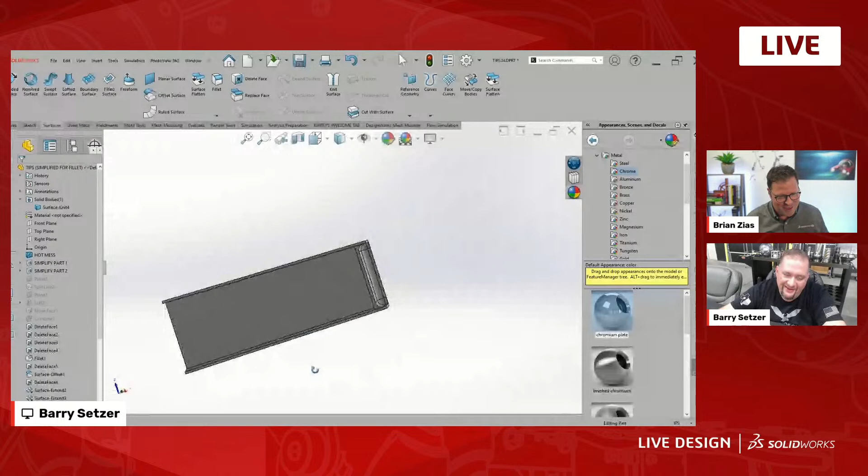Yeah, it's going to curve in every direction. So you've maintained that in each of your methods. Yep. And every one of these walls was built with splines, as a lofted surface, so they have curvature in both directions, even though it's very slight. It's there. Yeah, man. I mean, that was quite the model. I know you can't necessarily show us that. Has a lot of some of the original drawings, but yeah, sketch picture.

We got a good response at the beginning of this episode, which is where Barry took us down his last episode with us last year. Talked a lot about sketch picture and how you made this, not this component, but similar components. I guess we have some time. Was there anything else on this spar you wanted to show us? No, I don't think so. I was just going to show a couple other random tips. Yeah, all right.

Why don't we take 10 minutes? Let us know in the chat how you're liking this. We had some votes for like an intersect masterclass. I think my guy Brad volunteered for that. So we can definitely do that. Part three, advanced modeling. But yeah, take 10 minutes. What else kind of top of mind tools are you using all the time?

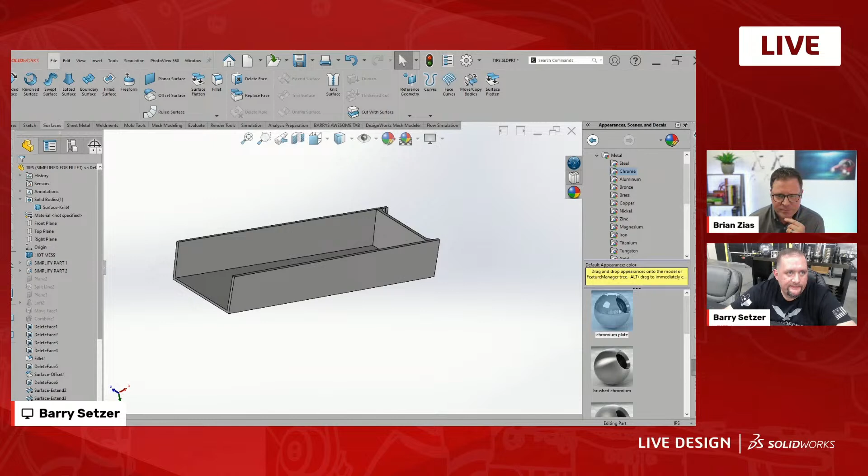So, one thing that I like is, I've done some pretty big assemblies, to the tune of 14, 15,000 components, particularly aircraft floor structure where you have thousands of Hi-Loks and different rivets and different angles and longerons and all this stuff down there. And so some of those assemblies get massive. And a lot of times you're bringing in the same components over and over, but they won't mate to similar faces. So if you're bringing in multiple instances of the same component, most of the time you'll use copy with mates. Like say you're putting a rivet in a hole, copy with mates.

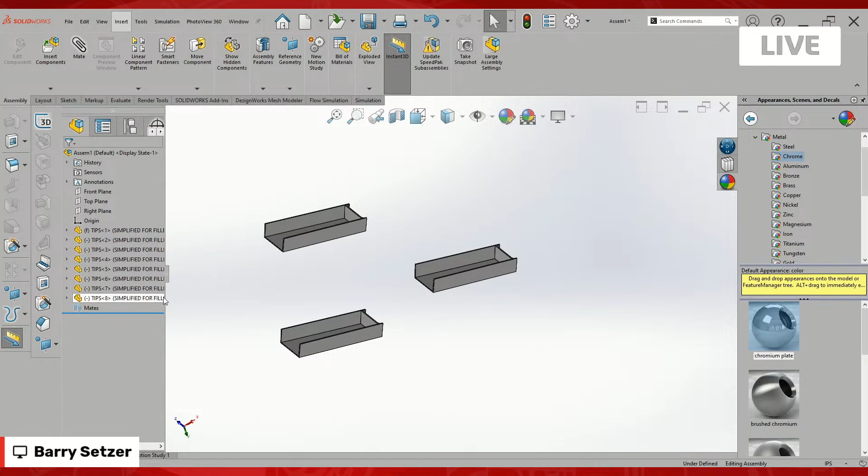But sometimes you're mating things a little bit different, and you just want to bring in multiple instances of a part. And to do that quickly in an assembly, rather than go insert components and then browse to your component, you can just hold control on anything that already exists in your tree, and then just left click and drag it into the graphics window. Oh, look at that. Instantiating new pieces of spars. Yes, so now you got multiple instances in there. Oh man, that's awesome. If you had mate references set up, I assume you could be snapping those into place. Yep. Control drag. Yeah, just one of those things that you may not know exists until you see somebody else do it.

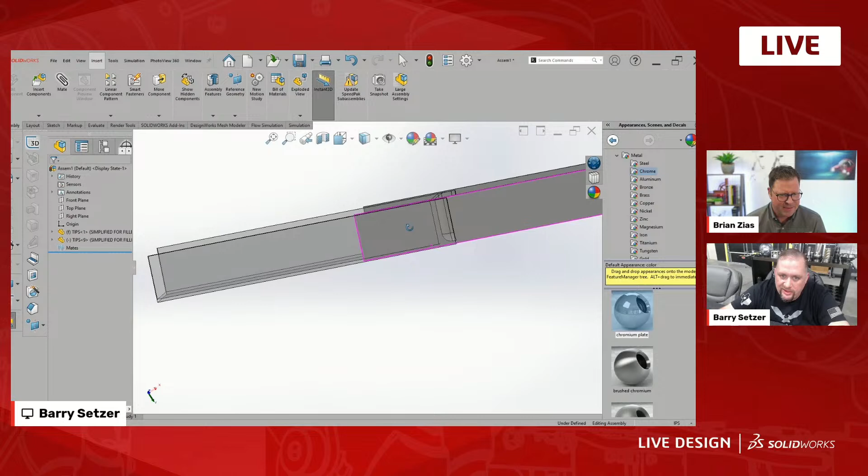Another one of my favorite tips and tricks. I was working at an emergency response vehicle place as a structural engineer, and one of the engineers there, I was looking at something on his screen with him, and he had a transparent component in front of another component. I always would rotate around until I could see the transparent component. There's daylight through there, I can grab it now. Exactly. And it's like, no, I don't want to pick the part behind it, I want this one. Select other. I guess you could do a right click, select other, but I never got the hang of that.

And so I saw him just randomly click and get the face he wanted. And I was like, what? Dude, how did you just do that? And he said, oh, to pick a transparent face, you just hold shift and left click. Shift click. Yes. So I was just like, man, that just blew my mind. I don't have to rotate to see daylight anymore. I'm so happy. Oh my gosh. So holding shift while clicking gets you the transparent face, or else your default is to select through transparent. Right. Yep. So brilliant. I thought that one was pretty awesome.

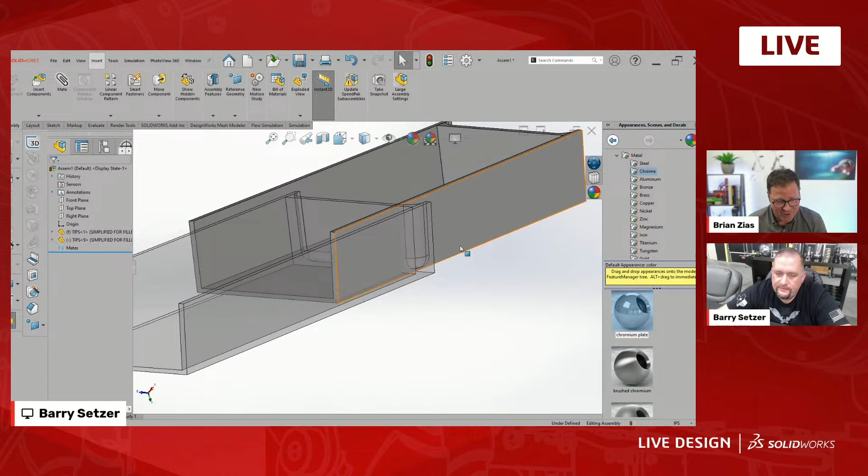You know about tab to hide, right? I mean, I'm not going to teach you anything, but maybe someone out there could learn from it. Oh, probably will. Tab will hide a component.

I don't know about that. There you go. Oh, wow. Okay, wait, go back. Put your mouse back where that was, and do Shift Tab. So Tab, and then Shift Tab will reveal it back, so you can dig down in an assembly, Tab, and then Shift Tab to bring it all back.

I did not know that. Oh my gosh! No, you're humoring me. I'm not actually. I like that one. There you go. Again, it's just one of those things that exists out there that until you see somebody else use it or somebody tells you about it, you didn't know.

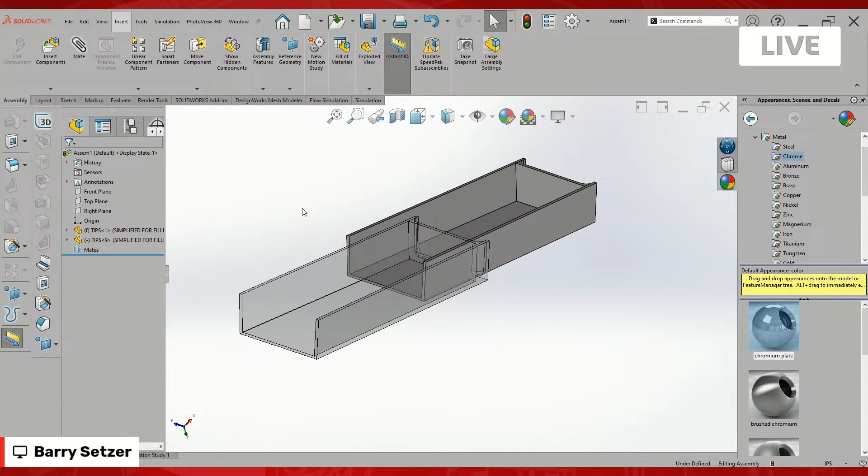The thing is, you got to think. Remember, SolidWorks was built on Windows from the get go, right? That's why it's easy to use and reminds us of Office products. And it's going to take advantage of those shortcuts like Control drag, Alt drag, Shift drag, Control C, Control V to copy paste, right? All these things to be a better SolidWorks user. Just find the way that works for you, and definitely try your keyboard modifiers.

And we were talking yesterday too about the graphical nature. When you select two items and you want to mate them or constrain them, use those pop-ups. Like if you want to mate two of these faces planar, just Control select and then use the pop-ups.

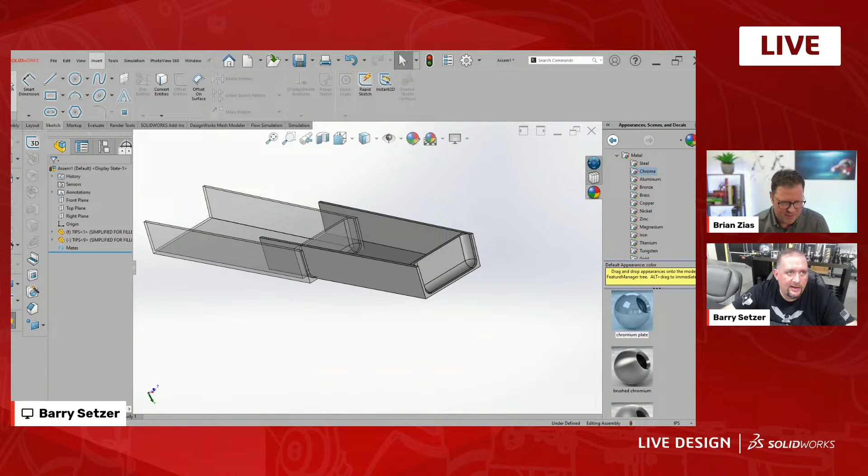Yeah. Even something that I learned watching our tutorials on our academy that I had never seen before was the little fillet pop-up. When you click a vertical edge and then you get that little fillet pop-up. What do you mean? Show us. Sure, I'm not sure if it'll work on this part, but let me do a new part real quick. It'll only take a minute.

Yeah, I'm sure we've all been in this. Like, hey, let me show you this, but I'm always going to start with my box. Let me extrude a new box, and then I can show you. That's right. If only I could just take a moment to make a template with a box in it. No, quiet. Some of the demo guys did that. They would have an empty box ready to go as a template. But anyway, I need to do that. Can't take the time to automate.

We're too busy. Right. So I was watching one of our tutorials, and our CAD beast, Billy, was giving the tutorial, and I noticed that when he clicked on this, he went up here to this, and I had never even noticed this pop-up before, because normally I'm so busy looking at where my next fillet is that I'm not paying attention to what pops up. And I saw him start hovering over the different options and seeing what was going to change. I'm not sure why it's flashing right now. Oh, yeah, it actually is not coming through.

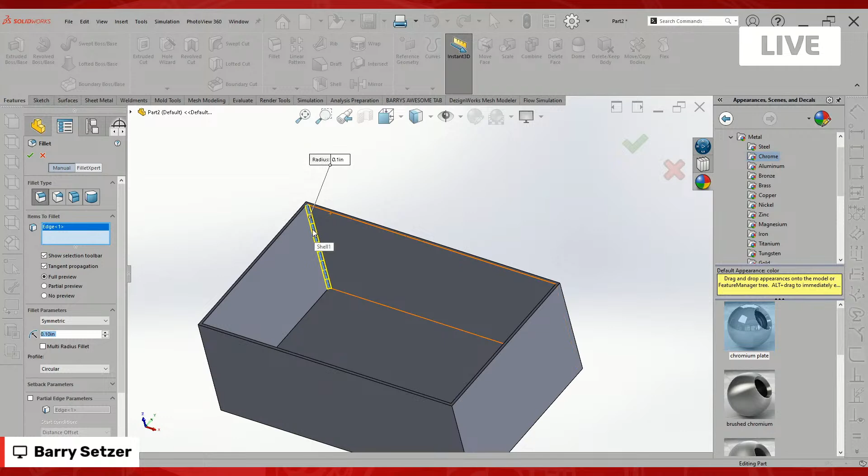But what you should be seeing is the quick select assistant bar, and it's almost forecasting what kind of edges you want to select, and you see those purple options that you're probably hovering over. Yeah, so even though I only picked that one edge, if I pick the first option there, it gives me a fillet on all vertical edges. I love that. I love it too, and it was something I never paid attention to, and it was like, wow, that's pretty time saving. Rather than rotating all over or trying to select through a face, just super easy.

Yes. I'm so glad you showed that one. Can you try and show that one again? It did glitch out for a second, but that's such a good one. It's that little quick select. So I guess it goes back to never disregard a pop-up. Right. If it comes up in front of your mouse. For some reason it's not coming through on the graphics, but that's fine. Just know as soon as you click that first edge, take a look at the pop-up next to your mouse and hover over each option and see what it'll do, because that'll be seriously time-saving, especially with geometric components like this one.

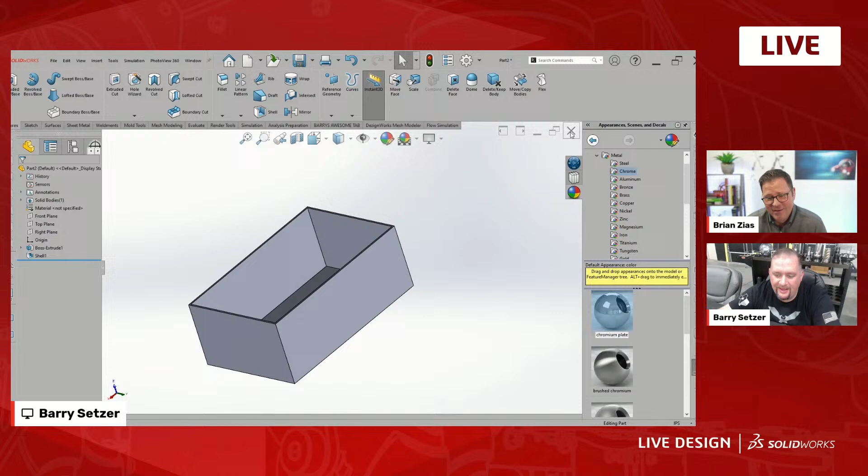All right, Barry, give us one more tip, and then I'll wrap up our episode for today. Unfortunately, the next stream is knocking at the studio door. They need to get in. It's a baking show, so I guess another kind of manufacturing.

All right, I think I'll just show one other thing. And again, this particular part may not be the best for it. We'll go back to our...

But a lot of times in aerospace, you'll have to put rivet holes all over these crazy contoured faces and stuff. And it can't just be planar normal to this face. The hole has to be perpendicular to the curvature. And one of the ways that I've done that, again, 100 ways to do it, but just a quick and dirty way, especially where I'll have a lot of this to do, I'll just do a 3D sketch,

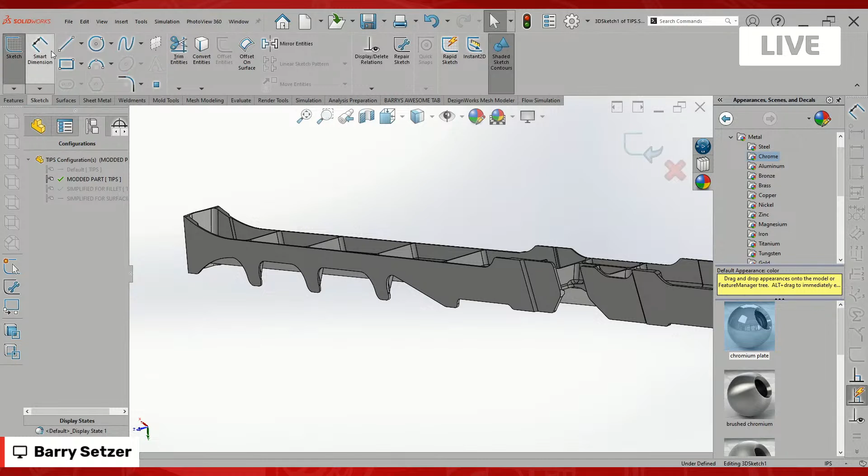throw a line on there, make it coincident or on surface. On surface, okay. Then I'll make it perpendicular to that surface. And then we could go in and dimension it off of edges or wherever we need to dimension it from. So now we basically have an axis that's perpendicular to that face at that point.

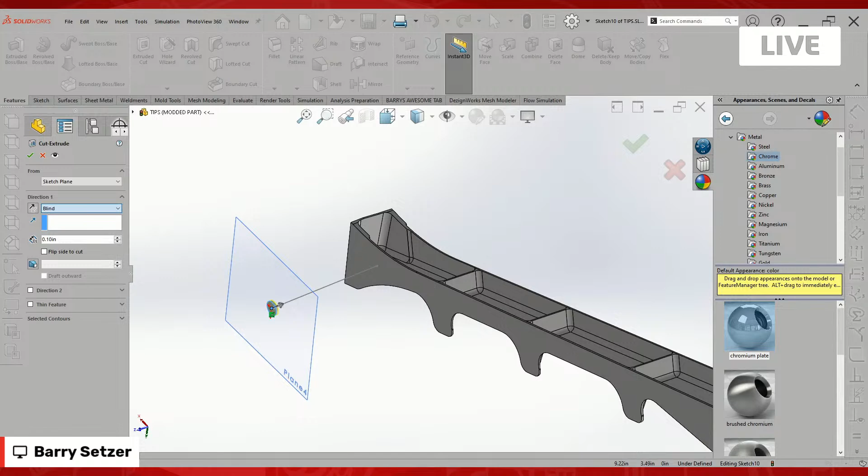Oh, and perfect, we can just throw a plane in. And we can pop our hole, knowing that it'll be perfectly perpendicular to that surface. Yeah, and I'm thinking if you used a 3D hole wizard, I know that's kind of a bad word sometimes because it's so undefined. But if you had that as a pre-existing sketch, I wonder if that would work to do a 3D sketch hole wizard and use that existing point. Something we can try. But that's awesome.

So because you're using perpendicular sketch relationship to the surface and then perpendicular offset plane. So a great example of just knowing your angles and what you're trying to build there with that axis. And for a machinist, a lot of times we won't get any of the holes in our models, especially with aircraft parts, because a lot of times they'll omit pilot holes. They'll only want certain holes in there, so their engineers will just give us a part with no holes in it. And then as a machinist, we're left with no 3D sketch that we could use hole wizard for. And it's like, oh man, how am I going to...

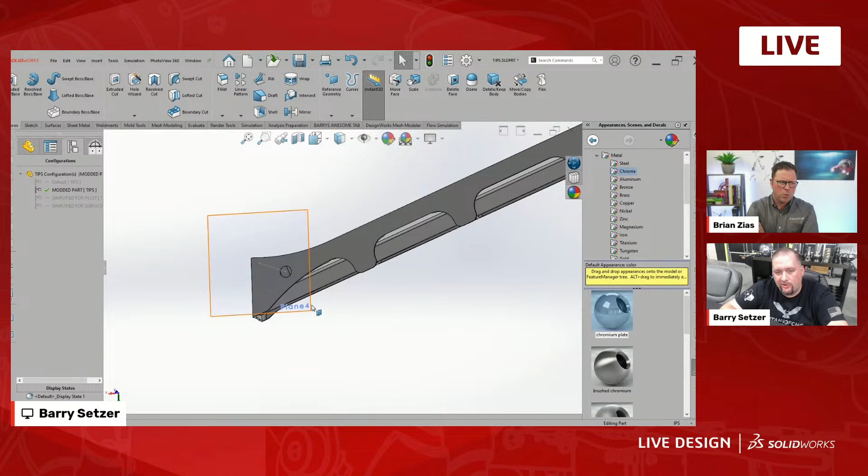Sorry, is it a hole table then? XY hole table? Or is it just on the drawing, like crosshatch? It'll be on the Mylar, where you'll have to measure each hole off of a known feature. What? So it'll just say, rivet holes should be perpendicular to surface, and then here's where they're at. Here's a pretty picture. Have fun. Wow, man. Okay, so not even going to be on the model, so you might need to add them. Yep, and maybe you'll only have to add a couple that are tooling holes. So a method like this, even though it may not be the best method, it is a quick and easy way to do that. So yeah, remember that 3D Sketch is your friend.